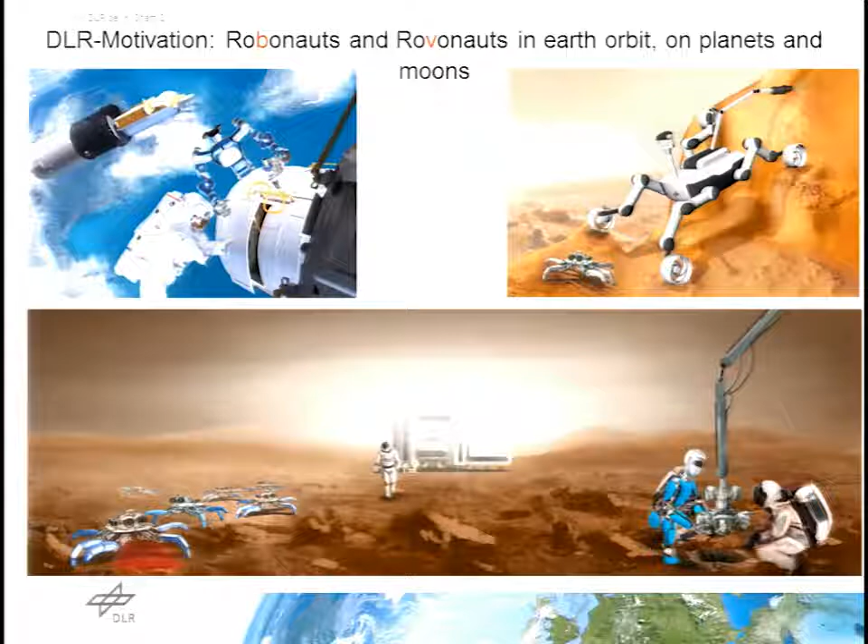I will speak about actuators for robots interacting with humans and unknown environments. Our primary motivation as an institute working in space is to design robots which can interact with completely unknown environments like planets and moons, or are able to interact with humans, with astronauts, to solve complex manipulation and repair tasks.

But generally, the idea of having safe and reliable helpers to humans is as old as robotics, and Isaac Asimov's literature with his famous laws of robotics made this popular.

In direct line related to that are some science fiction movies. One of them plays in Chicago 20 years from now. In the upper corner, you can recognize probably the structure of the loop. I have chosen some sequences because this movie carefully shows what we would like to have from such robots.

You see here, robots should be safe and reliable to humans, should solve tasks which are dirty and difficult to be done by humans, should solve some tasks with higher than human performance, and being a good companion. And of course, we would like this robot to move at velocity and performance which is similar to humans.

But probably most of the robotic people watching this movie ask themselves, what would I put into that actuator to have a robot which is that slim and as fast as it is today? And will we succeed in 20 years from now to build something like that? So this is what my talk is about: our activities towards actuation.

I would like to highlight mainly two perspectives in our evolution. We invested in the last 20 years some time in designing lightweight structures where we focused on the mechatronics design, integrated modular components. The main feature is the fact that they have software-based compliance using torque sensing.

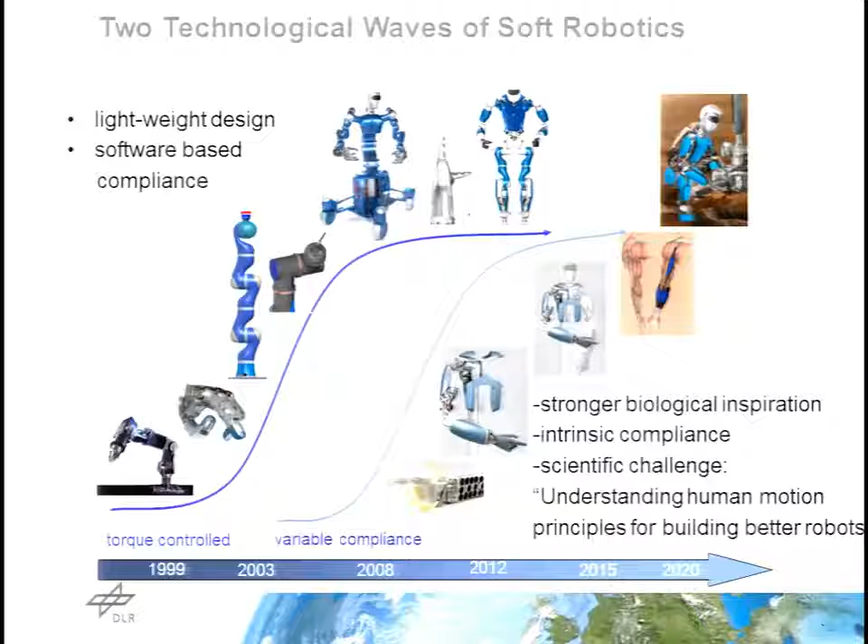So just to summarize the technology which is today considered state of the art, and we were one of the institutes pushing this technology forward: standard mechatronic design in the sense that we have brushless motors, which are optimized for high torque at low velocity, harmonic drive gears, but most important, we have the torque sensor, which is placed after the gearbox and allows for compensating of friction and reducing the inertia, such that you have an almost ideal torque source, which has been the dream of robotic control designers for many decades.

And still, these robots intrinsically, parasitically, have some compliance. So you need the torque sensor also to compensate for this elasticity. But this comes parasitically with the lightweight design, and was not introduced by purpose at that time.

But still, we had to learn how to deal with this compliance, and there has been some seminal work of Alessandro De Luca and Mark Spong, which helped us in that way.

And on top of this torque interface, we have compliant control. Again, based on great work of Neville Hogan and Oussama Khatib. Stefano contributed a lot to compliance control.

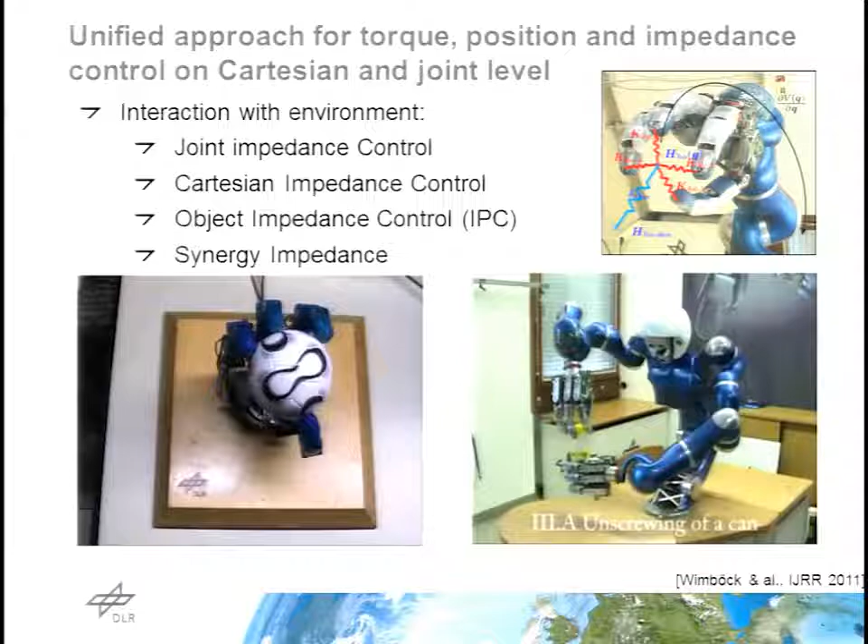The basic idea is that you have virtual springs, which you attach to the rigid robot in order to grasp objects. You would attach springs from the finger to the middle of the object. And then you would transform those virtual spring forces to joint torques.

This is a very simple concept, but can be hierarchically extended to grasp with two arms, to move objects around in several hierarchical structures. And you always do the same: you compensate gravity mostly based on motor position, but you have to take into account elasticity.

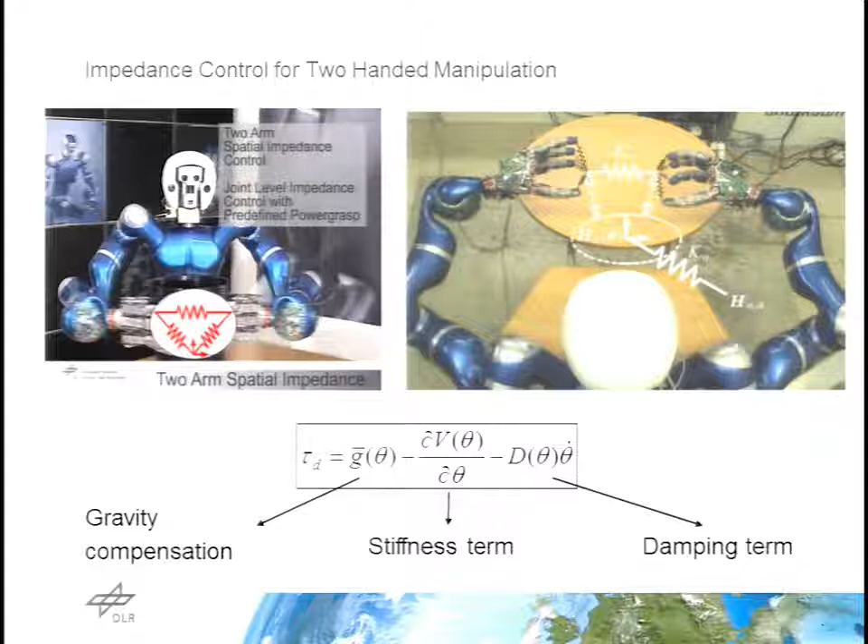Then you have one component which is related to the derivation of the elastic potential, and by deriving this with respect to the joint position, you provide joint torques, and then you add some damping. This is pretty simple, but we extended this over the last years to more and more complex structures, like the humanoid.

With 43 degrees of freedom, you can see hierarchical tasks: the robot holds the position, follows the human, avoids the collision with the second human, avoids singularities, controls the posture, and so on and so forth.

But you have to keep in mind that all this structure is purely implemented by control, and the robot is more or less rigid.

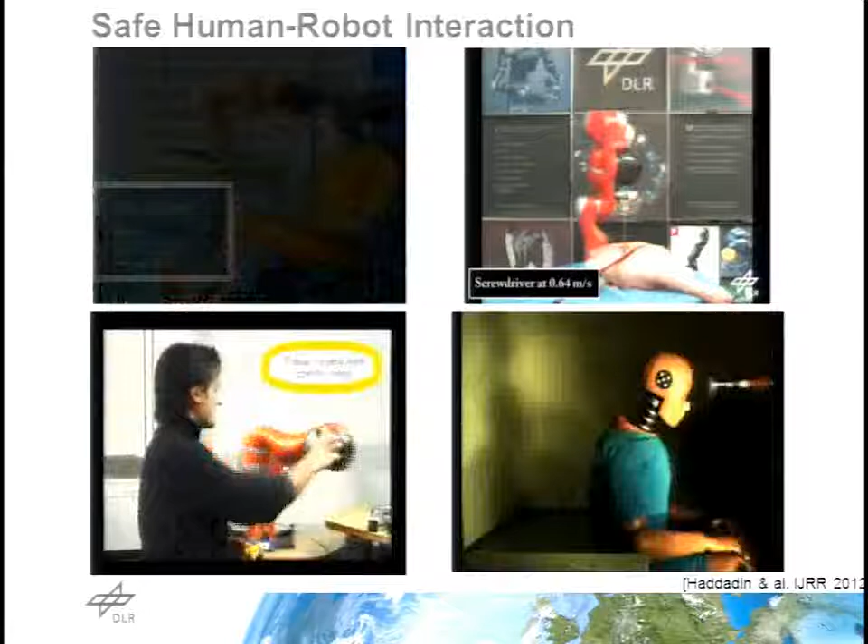You can use torque sensing also to detect collisions with high accuracy in order to provide a safe robotic system, and this was what we had to deal with when commercializing the lightweight robot structure, or the lightweight robot technology, with our partners from KUKA.

This technology, because of its modularity - the whole electronics and mechanics placed within one module - could be extended to more complex humanoids like Justin, and also to other application areas like medical. As mentioned, we spent a lot of time commercializing this technology. Many of you know the robot.

The last prototype I would like to show, since I started by motivating with humanoids, is the work done by Christian Ott and his group integrating the lightweight robot components into a humanoid. He started this work after spending time in Japan, in Yoshi Nakamura's lab, and extended the work we'd done for manipulation for several years into balancing on uneven ground.

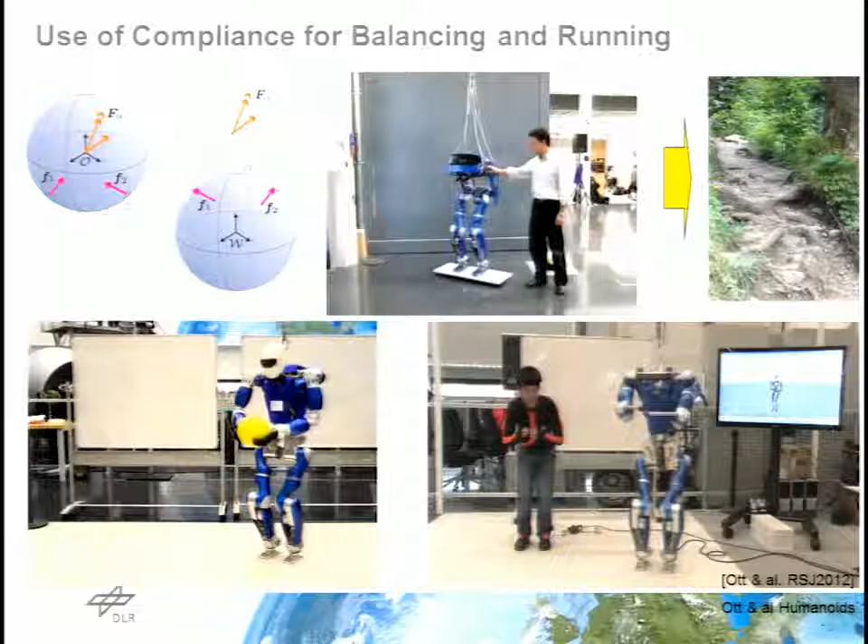Intuitively it is clear, but he has methodologically shown that grasping and balancing are closely related. Basically it's a dual problem - balancing as you would manipulate the ground.

Of course we are not the only ones doing humanoids with torque interfaces, especially on hydraulic actuation. There has been very impressive work starting at Sarcos, and the newer work with Atlas by Boston Dynamics. They have hydraulic actuation, which also has precise torque sensing, and all those robots have very good control performance. However, they have limited power to weight ratio, and this is particularly true for electromechanical actuators.

This was also one of the main messages at the IROS workshop on actuators, where we saw that many designers still struggle to design actuators which preserve the performance of electromechanical actuators, or electric motors - which is very high - but this performance drops as soon as you attach gearboxes, and becomes much worse than human performance. So we're still searching for ways to improve torque at low velocity in order to achieve biological performance.

One other drawback is important for these systems. If you look at these pictures, and those working with these robots know, you'll notice there is always a cable suspending the robot to prevent it from falling down. Everybody knows why - if such a robot falls down, the control compliance is not fast enough to react, so most probably the robot will be damaged.

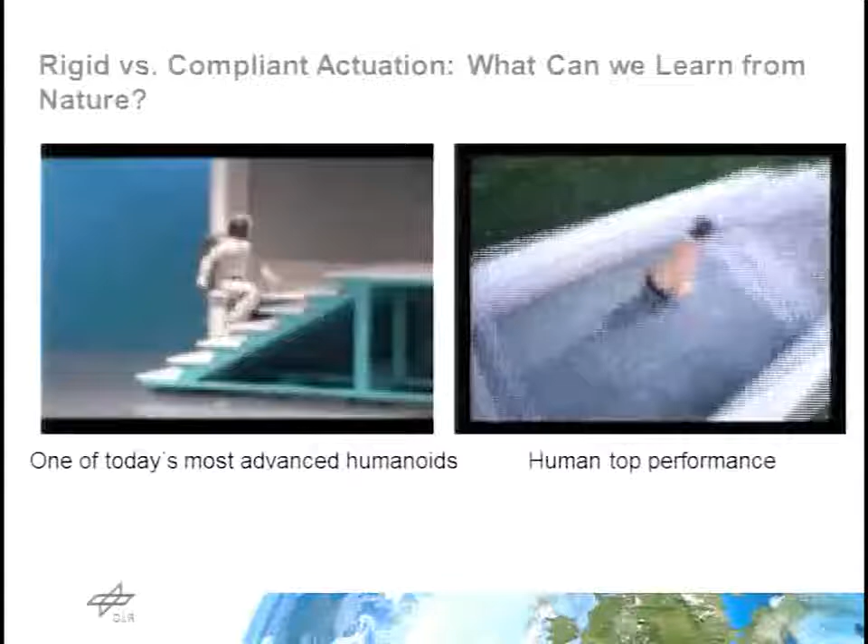This is, of course, in striking contrast with what humans can do - well, at its limiting or high-end performance at times. And this motivated researchers over the decades to think about deliberately introducing elasticity into the system.

It's easy to see why on this picture showing a parkour athlete. He uses the elasticity of the tendons and muscles, first to store energy when jumping and producing an explosive motion, and on the other side to absorb energy at the impact when falling down, and to limit the peak torques at impact in order not to damage the muscular structure.

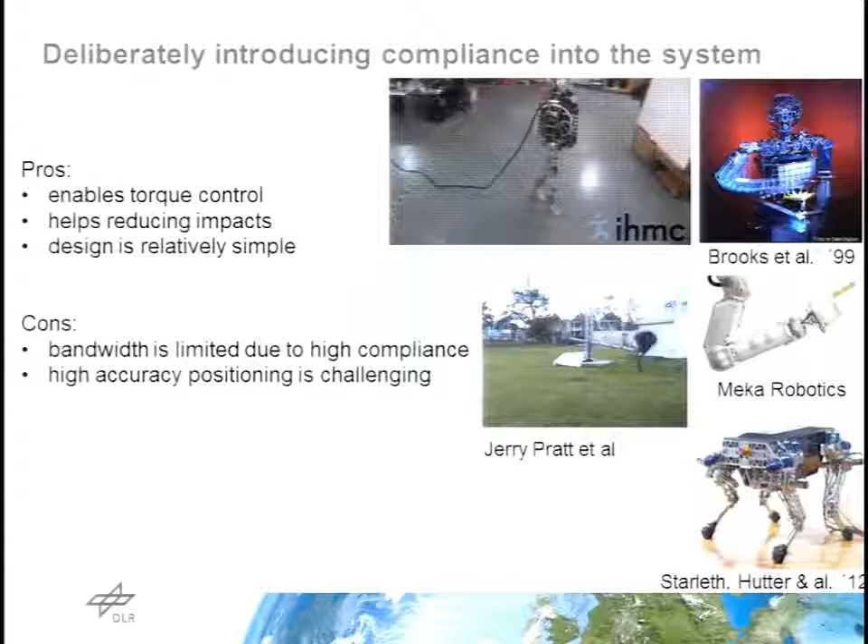In the early 90s, this idea appeared mainly in groups in the United States, and here are some images showing series elastic actuators. They had the big advantage of being able to provide a torque interface of pretty good quality - although probably not as good as with a torque sensor - but they help reduce impacts, and they have a relatively simple design: you only have to introduce an elastic element in series with the structure.

We have here several examples from manipulation but also from locomotion - some videos kindly provided by Jerry Pratt, showing the Spring Flamingo and the humanoid.

Interesting technology. One drawback might be that due to the very high compliance, bandwidth is limited, so as soon as you would like to do a very fast motion to react quickly, this is a limitation. High accuracy in positioning is also a challenging task - we've seen that even for the lightweight robot it's a challenge to deal with compliance, and in a compliant structure this is even more difficult.

This motivated groups worldwide, particularly a pretty large group in Europe, to think about systems more inspired by biological examples - looking at the way antagonistic muscles are used in biology to generate motion and robustness. Antagonistic muscles can move the joint but also co-contract to change stiffness. A simple example of how you can translate this into a mechanical system is using two motors with two tendons.

And by moving the motors, we will move the link. You need a nonlinear elastic element, but by pre-tensioning the string, by increasing the tension in the cables, you could increase the apparent stiffness of the system.

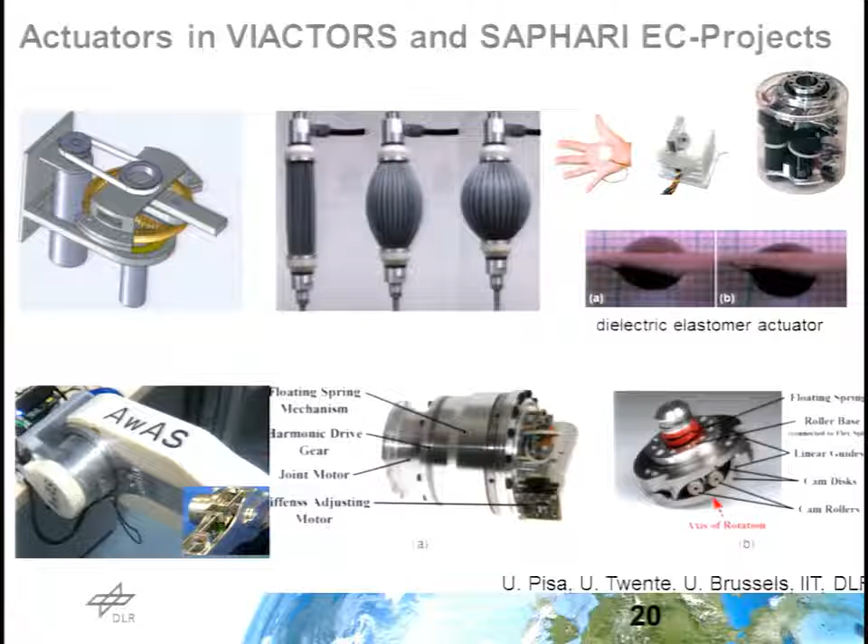For example, one solution which has been adopted also in our prototypes and also in Antonio Bicchi's prototypes is to use the fact that motors can not only pull, but they also can push. By closing the wire loop, you can use actually both motors to hold heavy loads,

and then you can make use of the whole mass of the actuator for holding and moving around heavy loads, while still you can co-contract the system to change the stiffness in the way described before. And again, the impact goes to the springs and not to the system.

Another way to save weight, if you don't want to change the stiffness quickly, is to use one large motor, for example with harmonic drive gears, to move the joint, and then just use a smaller motor with high gear ratio to pre-tension the springs and change the elasticity of the system.

But obviously, each design has some advantages and some drawbacks, and it's hard to compare them by just one number, as we thought initially when we started this work. Instead, we had some very intensive debate and came out with a list of characteristics which describe this kind of actuators.

So in addition to the classical power, torque, velocity, and so on, you need, for example, to describe the stiffness range of the actuator and how the stiffness range changes when the torque changes, how fast you can change the stiffness, what's the maximal energy you can load on such a system, and so on.

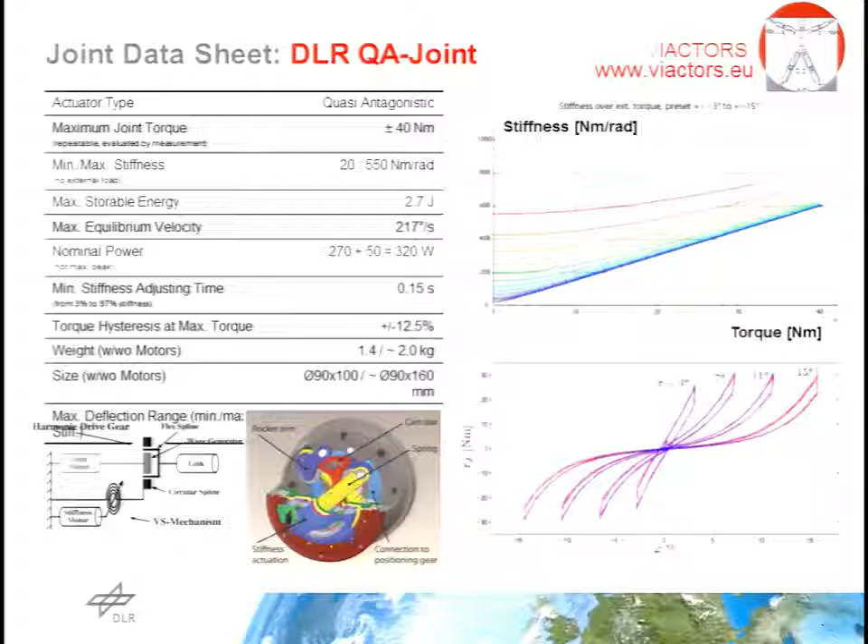Just two examples of very, very different applications. Actually, at DLR we focused on highly integrated, very complex prototypes in which we try to mimic the performance of the human arm as best as possible.

In contrast, the group in Pisa is focusing on commercializing systems and providing the scientific community with systems on which they can develop software and controllers, and which are affordable in the low-cost area. And of course, the systems will then look very different.

For example, in our case, we have 19 degrees of freedom in the hand, 38 motors in the forearm, 7 degrees of freedom in the arm. This leads to a large number of actuators, of course. So for the whole dual arm system, we have over 100 motors.

And because this is a first system which we built and we wanted to experiment with different designs, we introduced this antagonistic actuation, but also this quasi antagonistic actuation, and also the design with a harmonic drive with a small gear pretension, just to have a comparison of these different approaches.

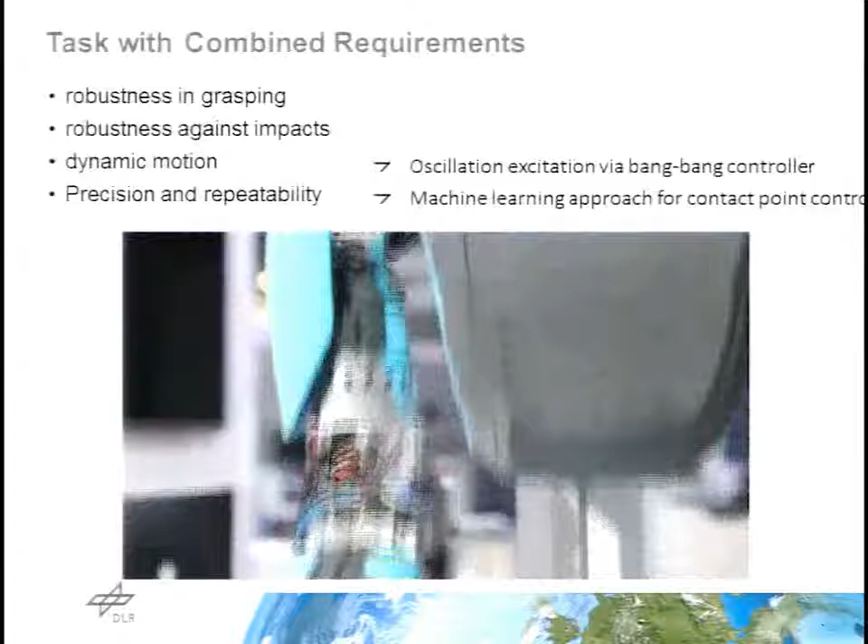And here I show a video which we developed for the Automatica fair last spring, showing the main features of variable compliance actuation. This is a task in which, first of all, you have to grasp an object and hold it robustly, also during impact.

Then you have always a hard impact of metal parts which would damage standard robots. Then you are using dynamic motion. Actually, this is done in resonance by using the springs.

And still, this is very precise and repeatable. You can see that we have, by a learning technique, accuracy below 1 millimeter by using iterative learning control. This is the DLR logo, which has been printed there.

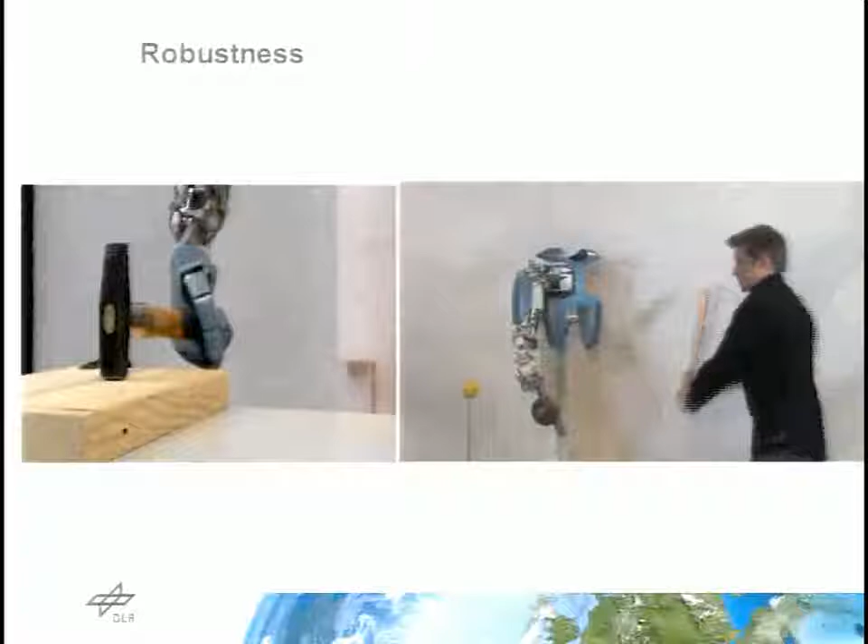So I think altogether, you need variable compliance to have all these features in one system at the same time. Some videos summarizing the main features. Robustness. You could not do that with a rigid robot.

You need series elastic actuation or variable compliance to withstand such impacts. Control cannot react so fast. Explosive motion, storing energy to throw objects, is also essential, requiring compliance. What we focused on more and more in the last years and months was cyclic motion generation.

I gave a talk at the workshop on Sunday, so I won't go into too many details, but variable compliance and compliance actuation in general is essential for this kind of motion. We noticed the community still has difficulties deriving controllers and planners that really excite elastic systems into resonance, because we lack a precise mathematical description of resonance in nonlinear systems. And optimization tends to take very long and breaks down for many degrees of freedom.

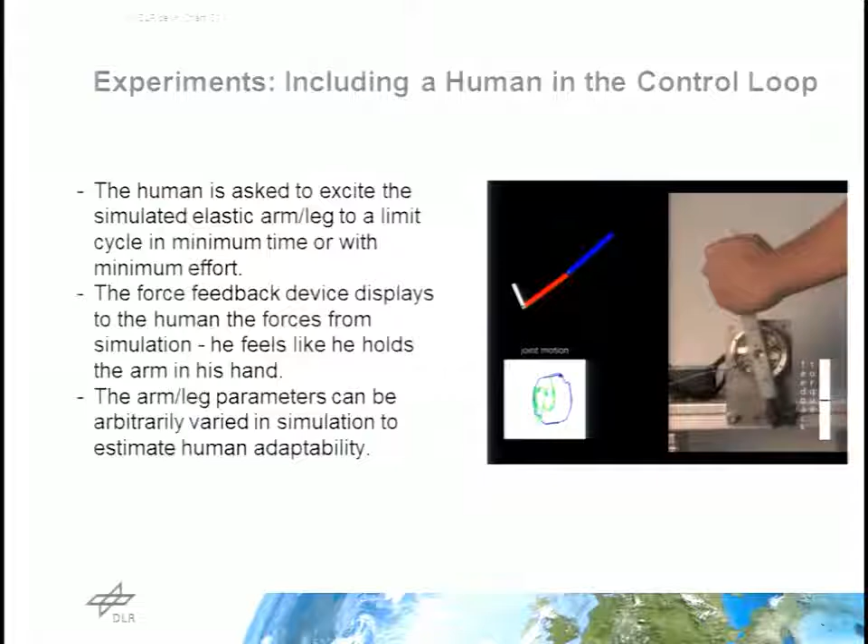So we did some experiments, trying to understand why animals, and in particular humans, are so good at exciting elastic motion. The experiment used a virtual reality device, asking humans to excite the motion of simulated robots.

We found that for one degree of freedom, the law is very simple. If you ask people what they do, they answer: we wait until the torque is high enough, then introduce energy by giving a jump in force or position. This is simple for one degree of freedom.

I won't go into details for more degrees of freedom, but the essential idea is to scale this concept to the multidimensional case by identifying the first oscillation mode of the system and exciting it using this bang-bang controller idea. To achieve that, one uses an adaptive mapping between the n-dimensional torque and the one-dimensional direction of the principal mode.

This mapping is adapted by a learning technique. Then in this one dimension, tau z in this case, we excite the oscillation motion, and project back into position space. All in all, although this control law was derived using pure robotics tools, it can be shown that it maps easily to a neural network.

It's a fan-in, fan-out configuration with very few neurons, which can also be trained with pure Hebbian learning, which is biologically plausible. With very few neurons, you can train the system to excite limit cycles without model knowledge, using just kinematic information of the system, which is an interesting fact.

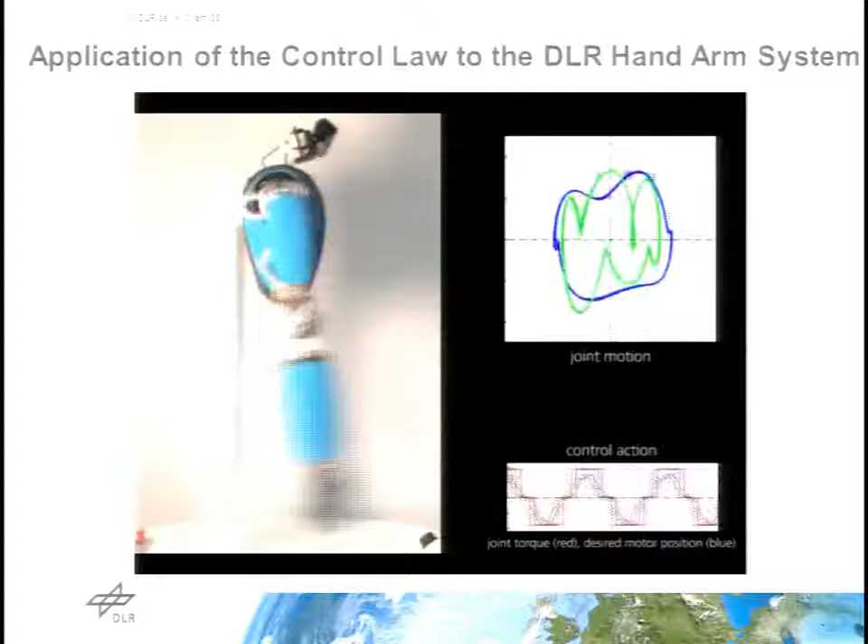We hope this idea can also be applied to designing running systems. We did some simulation work, and had several discussions with people already building series elastic locomotion systems, like ETH or Oregon State University, hoping to apply this to locomotion where elasticity is probably most relevant.

With this I'd like to conclude, showing that we are at a point where the design of our robots is so close to human biomechanics and human properties that by recreating these functionalities in robots, we can learn about the structure and control of humans, and at the same time use this knowledge to improve our robots, bringing this benefit back to humans through better rehabilitation devices, prosthetic devices, and assistive devices. Thank you very much.

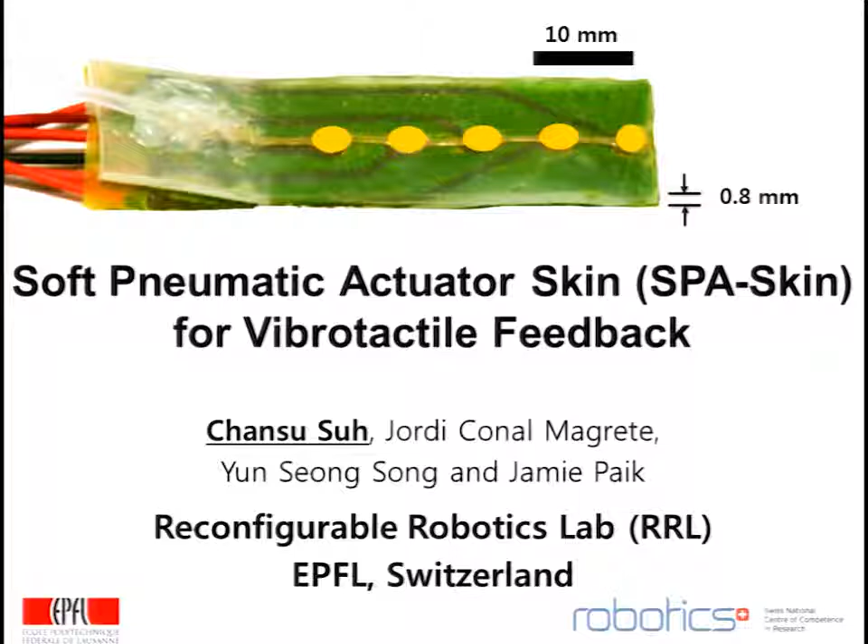Wearable devices often need to produce electrical, mechanical, or thermal stimulation upon receiving external force. Among them, one of the safest and most often used is vibrotactile feedback. Using different patterns and intensities of vibration, we can regenerate different tactile sensations in various locations on the human body.

Human skin can decipher a wide range of vibration and haptic feedback. This, of course, depends on surface and material. Vibration is characterized by the combination of amplitude, frequency, and direction of the signal.

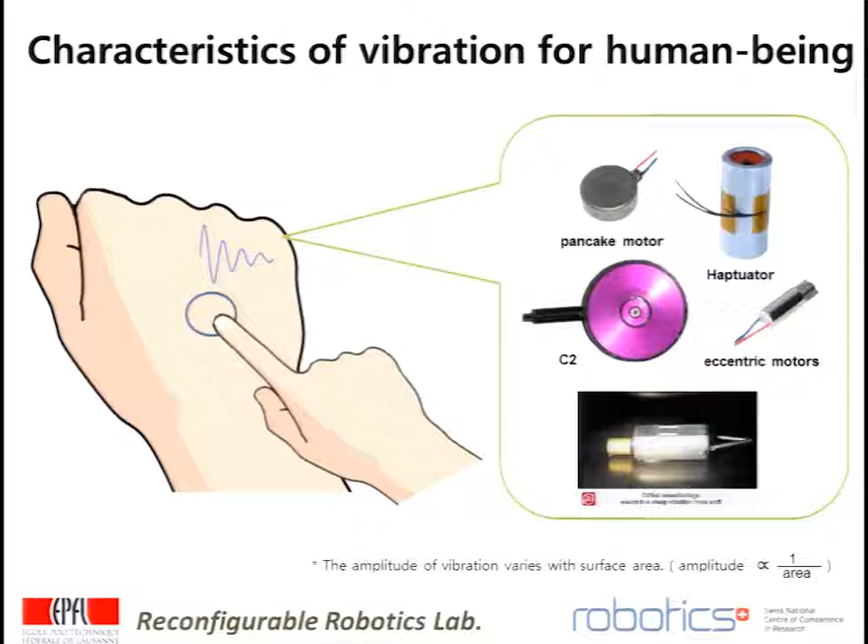Currently, there are many kinds of vibration motor. However, the choice is limited, as most of them are very thick and heavy and have only one linear direction of vibration. SPA-Skin is a novel vibration actuator embedded with a distributed sensor that can produce highly customizable, lightweight input-output devices for tactile feedback.

SPA-Skin has multiple points of actuation, which are all embedded with a discrete sensor, here 5. They can not only sense its own vibration, but also measure external force as well. This SPA-Skin design can vary and accommodate multiple configurations, so it can cover wider and curvier surfaces for actuation and sensing.

This customizability allows SPA-Skin to be ideal for wearable robots, covering different locations on the body. This figure shows application on the hand and forearm, but you can easily see the application on the shoulder and chest as well. What is here is the sensor embedded actuator with 5 actuation points. The frequency is 25. The 5 boxes show the sensing location, they stay green and blink for each actuation, and turn red for the external force.

The main contribution of the novel SPA-Skin is we have presented a highly intensive vibrotactile feedback hardware that remains highly flexible, a lightweight wearable device, and distributed sensing and actuation allows it to be applied to many kinds of applications.

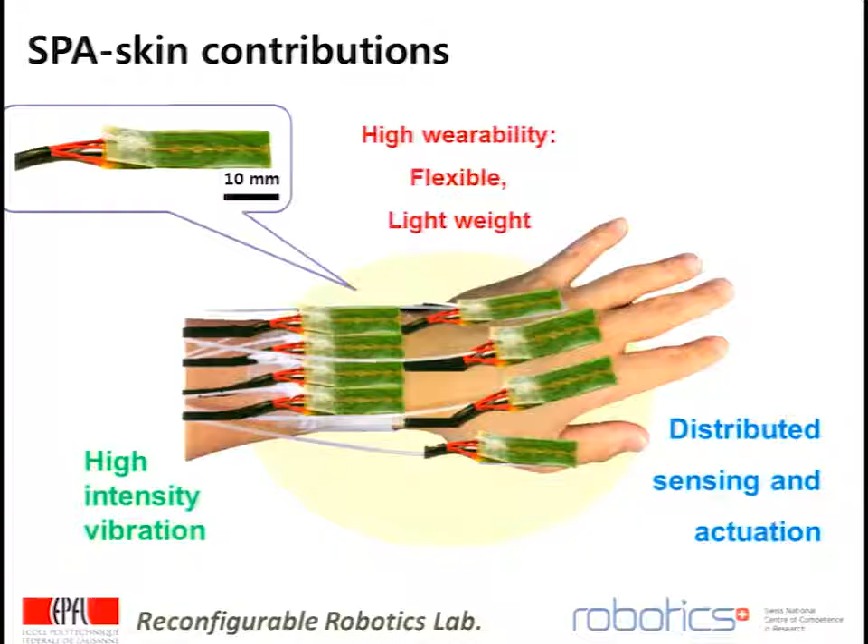I want to introduce an interesting transmission idea that we are working on. Let's say there is a string or a bundle of strings. If you twist it, then it contracts. So by applying small input torque, we can obtain a large amount of contraction force. Basically, a string is a kind of gear.

By coupling a rotational motor on one side, we can make an actuator module, and we named it twisted string actuator, in linear or rotational configuration.

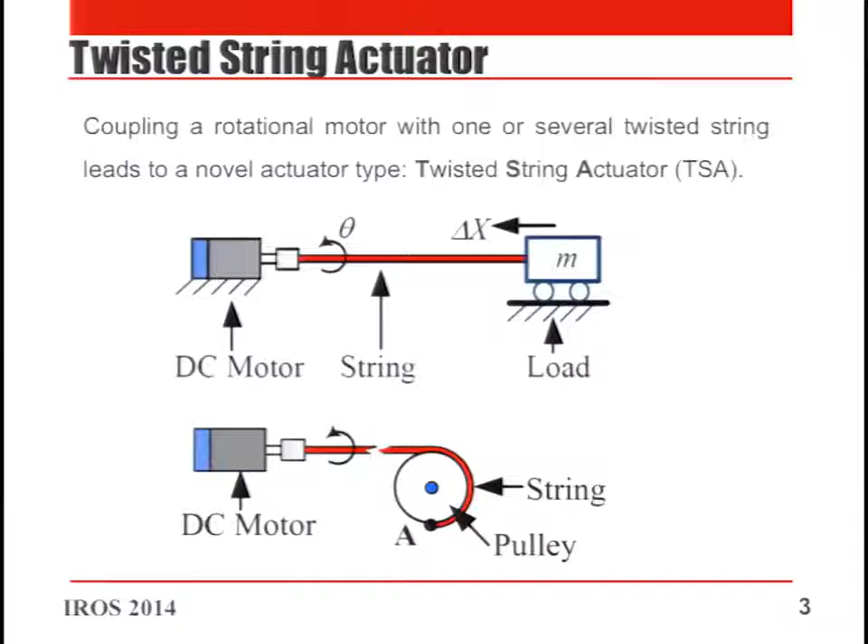The TSA has several fascinating features, especially in robotics or exoskeleton kind of systems. It is very light, cheap, and easy to replace, and can transmit power over distance. It is intrinsically compliant and also backdrivable, and the motor can be placed coaxially with the axis of motion, so we can save lots of space in designing.

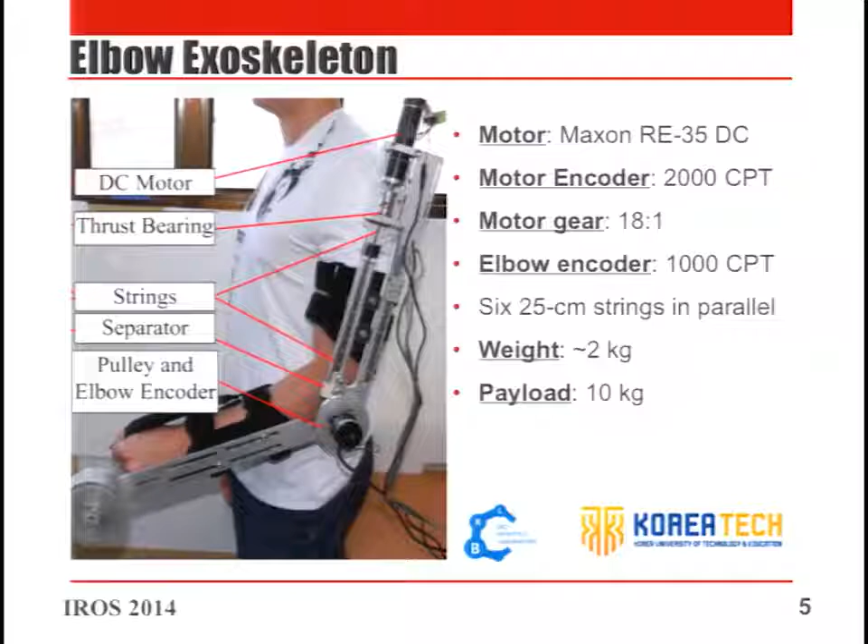It can also tolerate some misalignment, so it can be applied to soft and wearable exoskeleton systems and wearable devices. This is the first prototype that we developed several years ago. It has a weight of 2 kilograms and a payload of 10 kilograms. As you'd expect, it has a unidirectional control limitation.

So to overcome this, we proposed a bidirectional elbow exoskeleton. This video clip shows you an idea of how this bidirectional elbow exoskeleton works in action. You can lift up heavy weight at a reasonable speed.

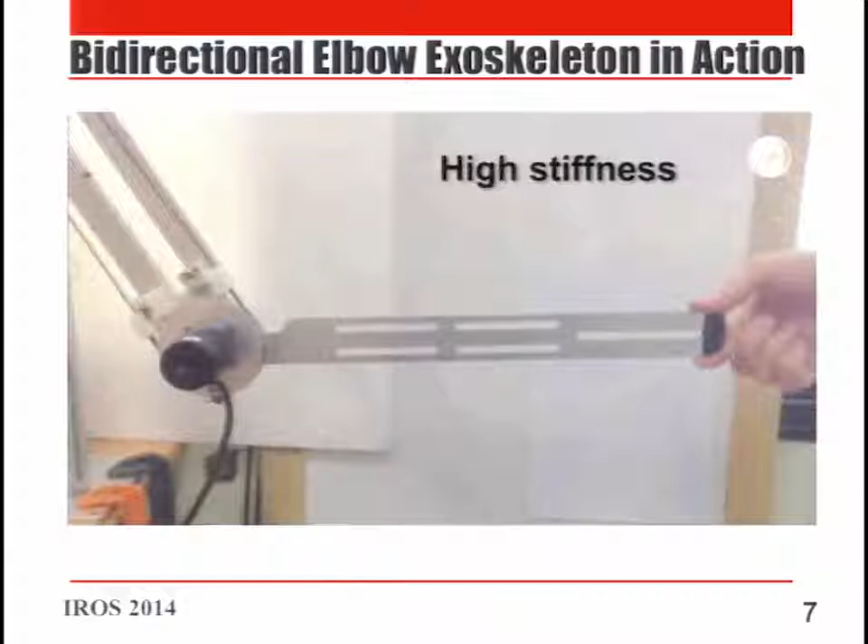By twisting and untwisting both of the wire strings at the same time, we can adjust stiffness, so high stiffness and low stiffness. One interesting feature is that due to the backdrivability, we can easily detect human intention, which can help trigger the motion of the exoskeleton system.

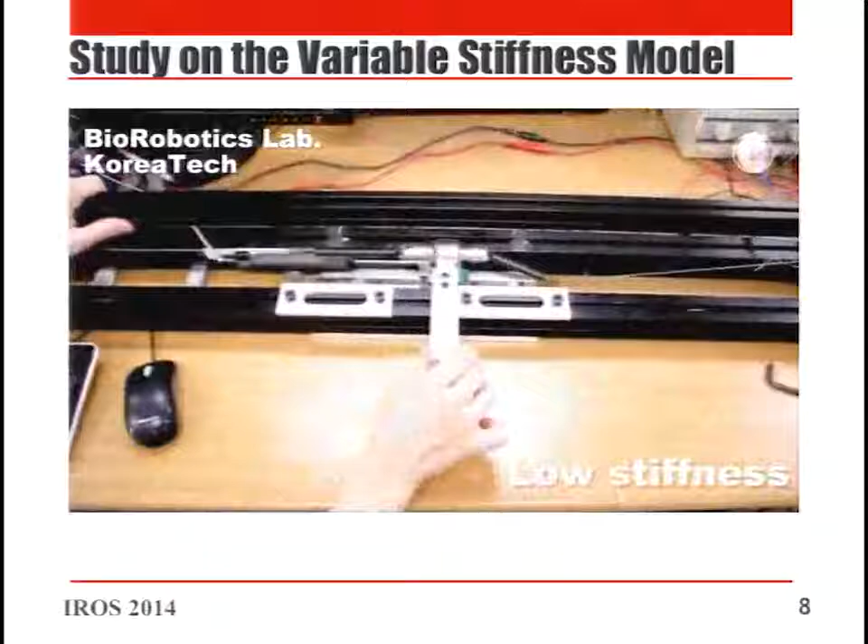In particular, in this paper, we have done some study on a variable stiffness model, because we know we can change the stiffness, but we didn't know the exact relationship between the amount of contraction and the stiffness variation. So we made a variable stiffness actuator module and did some study about this.

As a result, we found that we can control the position and the tension independently. If you want to know more, I want to see you in my interactive session. Thank you.

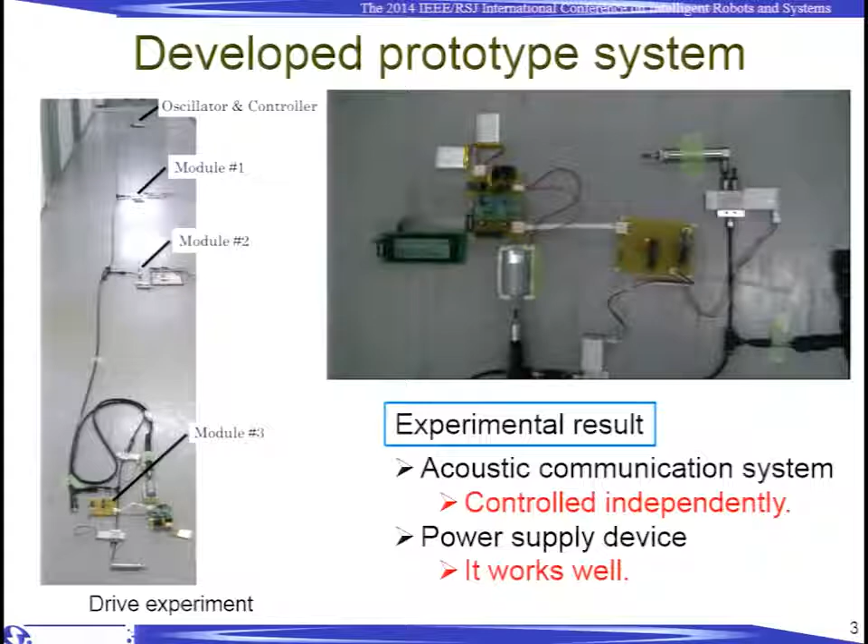Okay, please look at this movie. In this experimental result, 3 pneumatic cylinders are independently controlled, and the power supply device also works well. Thank you for your kind attention.

At Disney, we are very interested in creating compelling interactions between people and robots. While human safety is an absolute requirement, we are not willing to sacrifice speed or expressiveness.

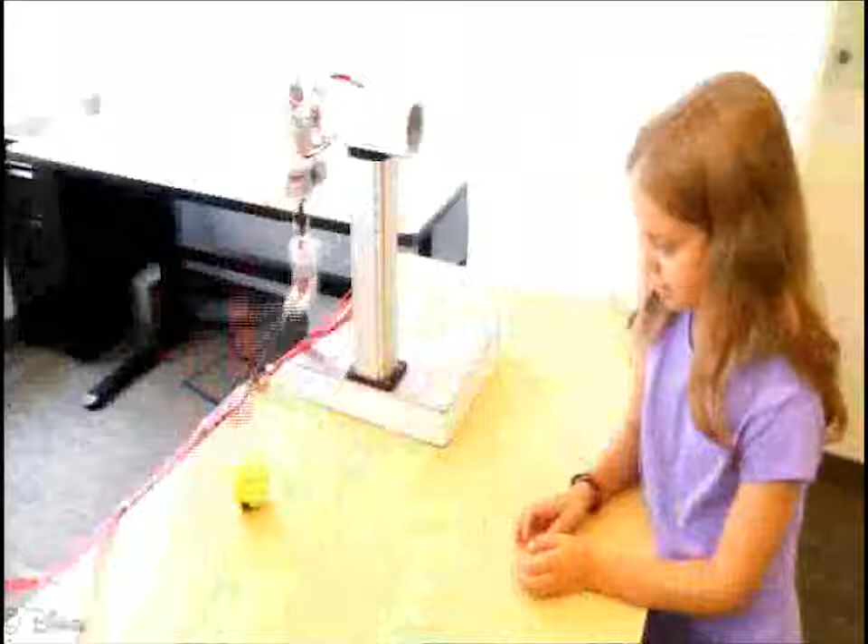To this end, we have developed a new type of passive hydrostatic transmission with either air, as in this arm, or water as working fluids. The transmission is leak-tight and low friction.

This pair of 4 degree of freedom robot arms are identical and connected only by pneumatic tubing, without any motors, sensors, valves, or controller. The key element is using rolling diaphragms to seal the cylinders. They provide a hermetic seal, and their rolling motion eliminates static friction, in contrast to conventional sliding seals.

We use pairs of cylinders to allow bidirectional operation, with the transmission fluid pre-pressurized to half the maximum operating pressure. This removes all backlash from the system. The transmission has very low impedance. There is no spring rate, and because of the transmission's symmetry and low friction, it is completely backdrivable.

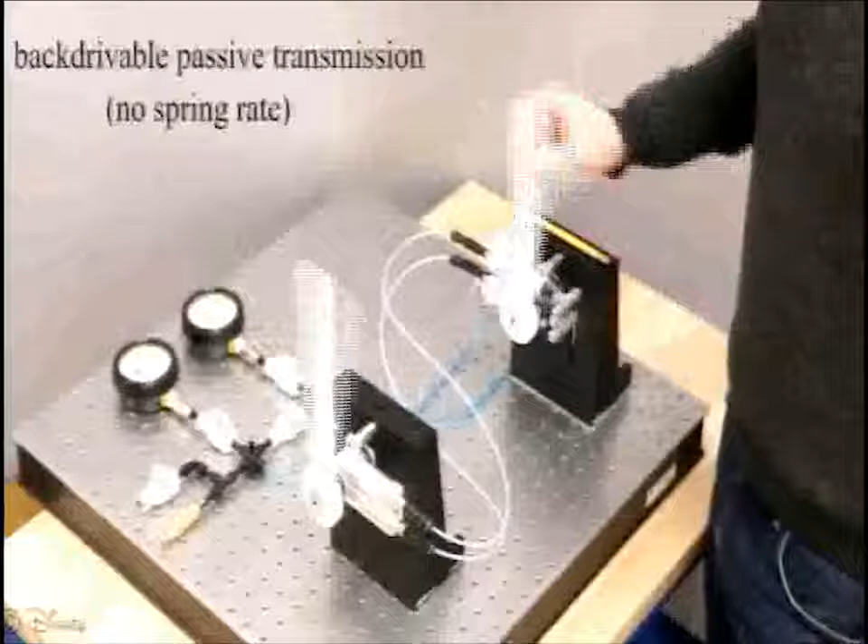The transmission is used passively for remote manipulation, as in the robot arm, or may be motorized at one end. Since it is fluid-based, we achieve high torque density at the endpoint actuator. The arm or limb is much lighter than if a geared electric motor with equivalent friction and torque performance was located directly in the arm instead.

With water as a transmission fluid, we achieve high stiffness and no lost motion between input and output. Fluid-based transmissions allow flexible hose and tubing connections and provide easy and adaptable routing. This transmission is capable of moving heavy loads at high speeds with very smooth motion.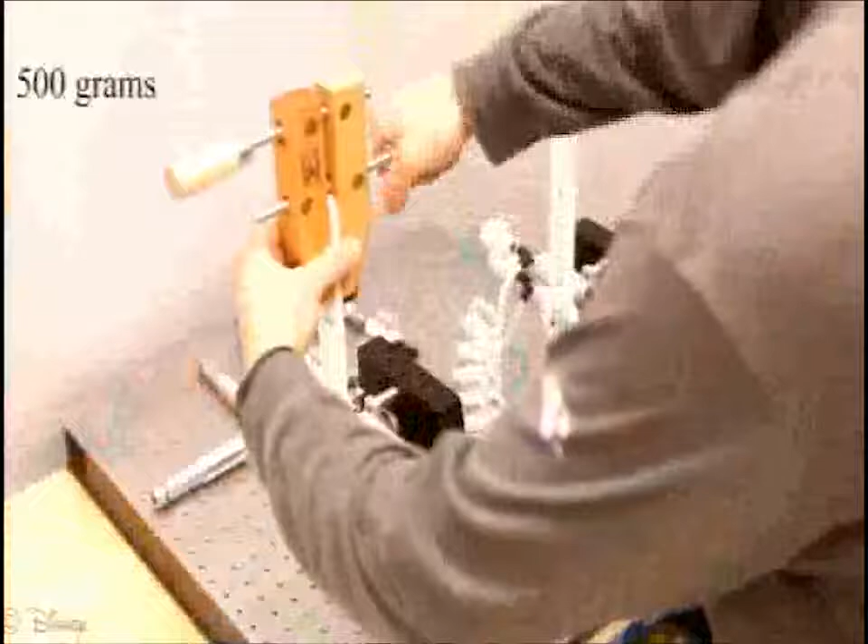The end-to-end delay through the transmission is only 12 milliseconds. Under high-speed video, you can see here.

The water-filled transmission achieves a force bandwidth in the tens of hertz. Combined with its high stiffness and low static friction, we find unexpected haptic performance. Surface textures can be felt through the transmission.

Here are work loops obtained under manual manipulation. In red, we see high stiffness when the input is blocked, and in blue, the measured output force against a virtual spring. Forces are very smooth with a measured hysteresis of 6% full range torque and a maximum static friction of less than 1% full range torque.

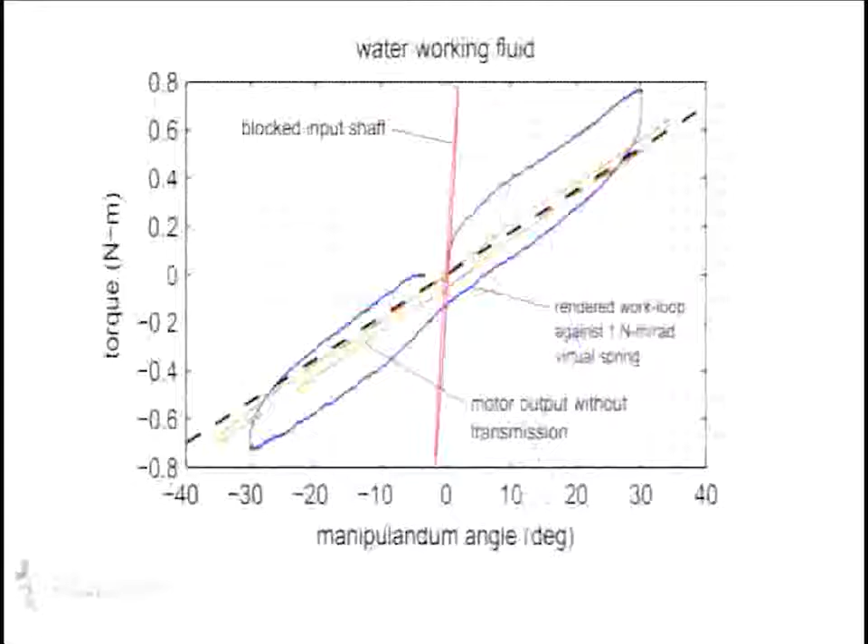In the latest version, the actuators weigh 120 grams, can deliver 4.5 Newton meters continuous torque, and have a 135-degree range of motion. Please come to our interactive session.

We have brought the robot arm with us. You can practice your glockenspiel playing. Thank you very much for your attention.

Good afternoon, everybody. My name is Clem Matthijssen. I'm from the Vrije Universiteit Brussel in Belgium, and I would like to present the work of my colleagues and myself on the design of a novel intermittent self-closing mechanism of a MACCEPA-based series parallel elastic actuator, or SPEA.

The motivation of our work comes from the fact that humans are still outperforming robots in many ways, for example their capabilities and efficiency, while on the other hand the electric motor is actually outperforming human muscles, for example regarding power density and maximum efficiency. So we come to the conclusion that the way transmissions and springs are used in compliant actuators needs drastic improvement, and we think the main challenges are the torque-to-mass ratio and the energy efficiency.

So the SPEA schematic can be understood as follows. We start from a standard SEA schematic. We add a bunch of springs in parallel there, and then we add de-phased intermittent mechanisms in parallel, which are shown here in yellow.

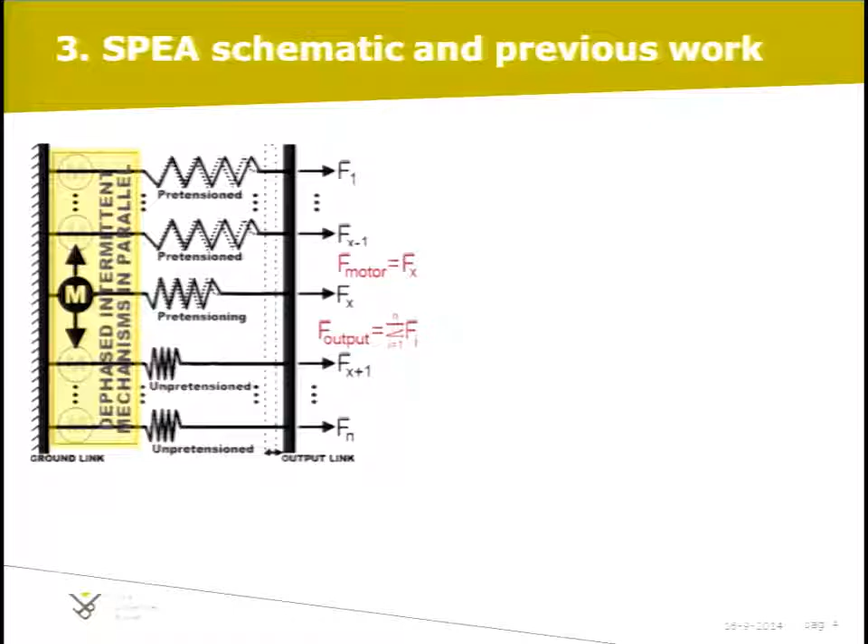So last year at IROS, we presented our first unidirectional prototype, which was based on mutilated gears. Today I would like to present a novel self-locking mechanism which will take care of the variable recruitment and locking of the parallel springs.

The system is based on the MACCEPA Actuator, which was developed in our group 10 years ago. The MACCEPA Actuator is a variable stiffness actuator, so you can change the stiffness and the equilibrium position independently. The virtues are the fact that there's only one spring, which can be linear, and the mechanism is non-complex.

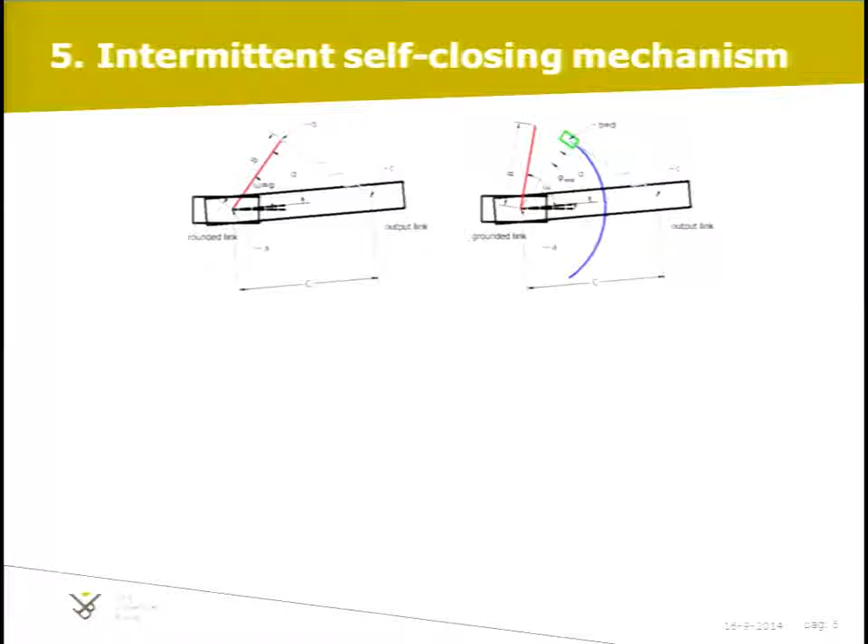So my goal was to keep these virtues and transform this into an SPEA actuator. So what we did was the lever arm in red. On the right is the newest system. We devised a guide that allows the lever arm to detach from the spring at the maximum deflection angle.

I would like to end with a video where you can see the working principle. You can see that the motor is rotating continuously while the springs are intermittently tensioned to the other side, and the self-locking mechanism takes care of the fact that each spring stays locked.

So when the motor is at the outer position, you have the highest output torque, but at that point the motor itself is not loaded anymore.

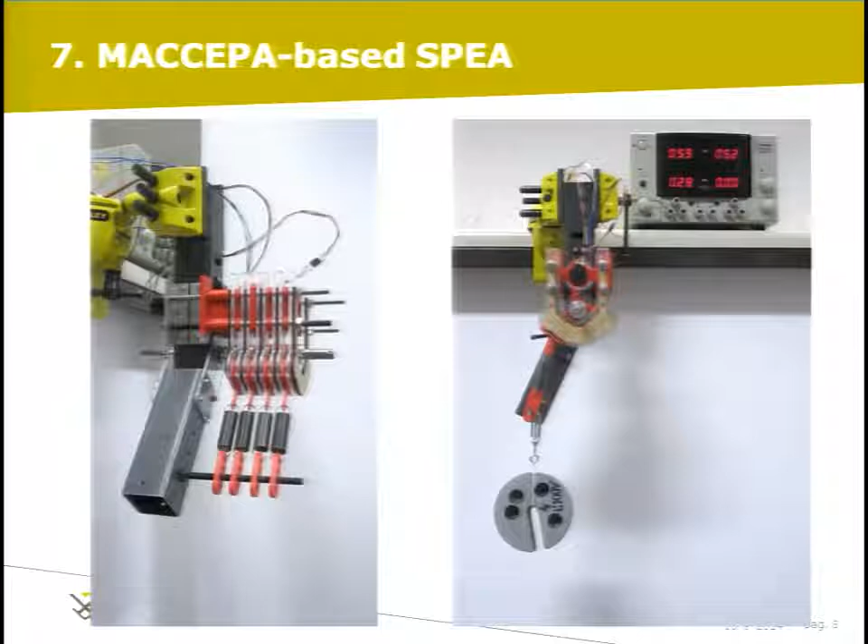Today I'm going to present work on a compliant actuator for biorobotics. More specifically, the aim was to develop a rotary parallel elastic actuator, and our proof of concept prototype was quite novel because it integrates a magnetic spring in the same design as the motor, allowing a very compact architecture which is also suitable to be scaled up and down.

And it is also possible to produce resonant oscillations. Actually, to the best of our knowledge, our proposed solution is the first in literature in which compliance is intrinsically embedded in the actuator.

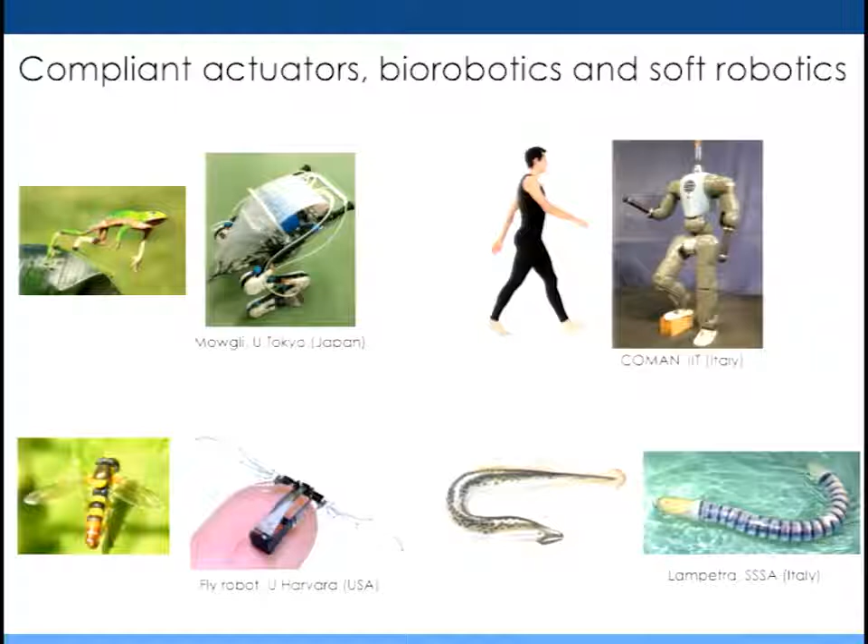I don't want to go into details because we already listened to many talks about the importance of having compliance in the actuator for locomotion applications. These are some examples. But of the two big families we know, series elastic actuators are the most popular, though parallel elasticity is also very useful in producing efficient oscillation, as shown by some examples in the literature.

For example, in some insects we have parallel elasticity of the body that allows the production of elastic torques which help the production of oscillation of the wings.

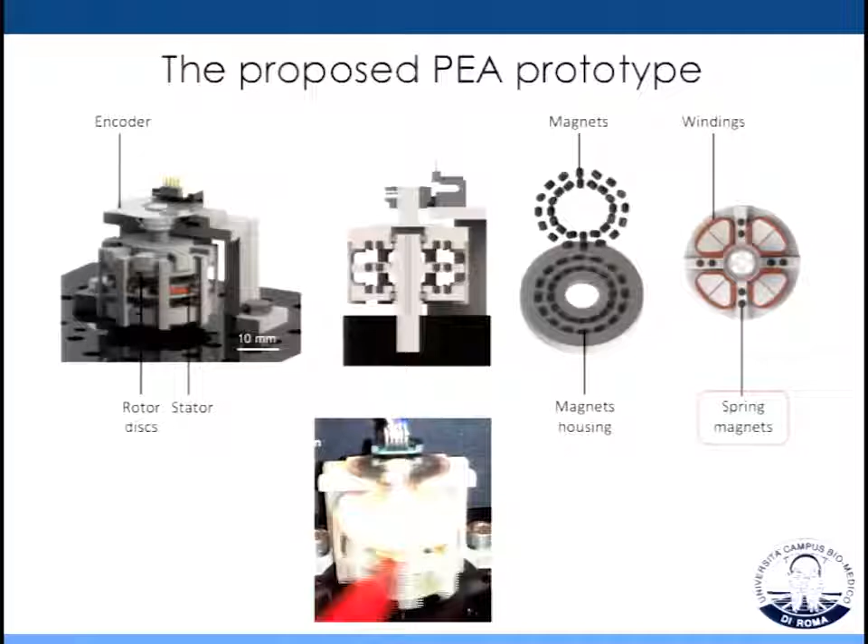So our actuator basically consists of a stator with windings and two rotors with magnets in a Halbach configuration, but the key idea is to add some magnets in the stator so they can be coupled to the magnets of the rotors and produce elastic parallel torques that help the oscillation, as shown in this video.

Here we added a tail to the actuator to implement a small robotic fish, but with some small modifications you can also achieve a robotic wasp, which is quite different but can also oscillate very well.

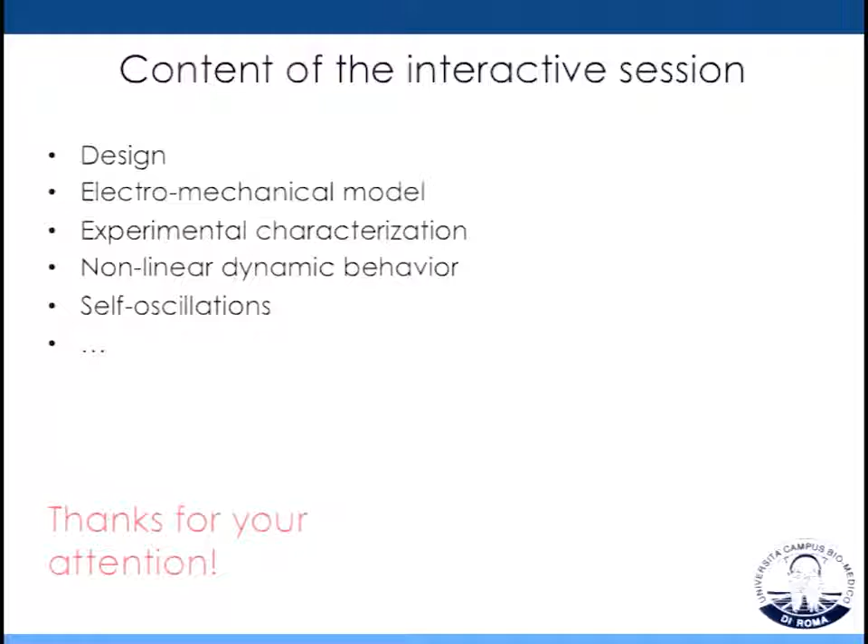For those of you that aren't familiar, McKibben muscles, or air muscles, are soft pneumatic actuators that contract axially when pressurized with air. These sorts of actuators have been used to create all kinds of non-traditional robots.

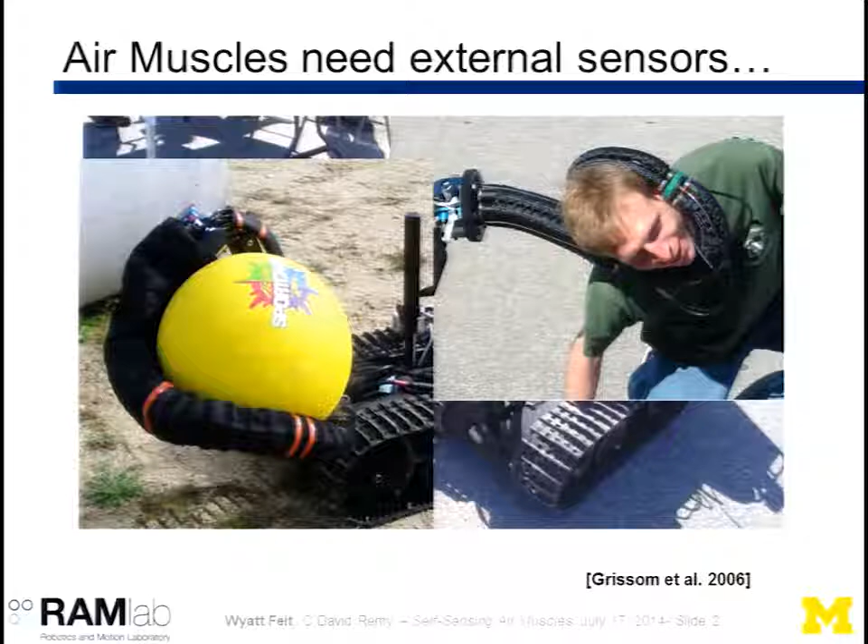But with these hermetically sealed actuators that are good to work in wet and dirty environments, they're still relying on traditional bulky encoders at the base of the manipulator. Here they have string potentiometers.

So here we have an actuator that's well suited for these non-traditional robots and non-traditional environments, yet we're using encoders that are vulnerable to those sorts of things and require traditional structures. It would be nice if these actuators could sense their own position and force output just as biological muscles do.

The way that we propose to do this is by taking that reinforcing braid that forms the contracting element of the actuator and making it into a circuit, forming the braid out of insulated conducting fibers and connecting them together.

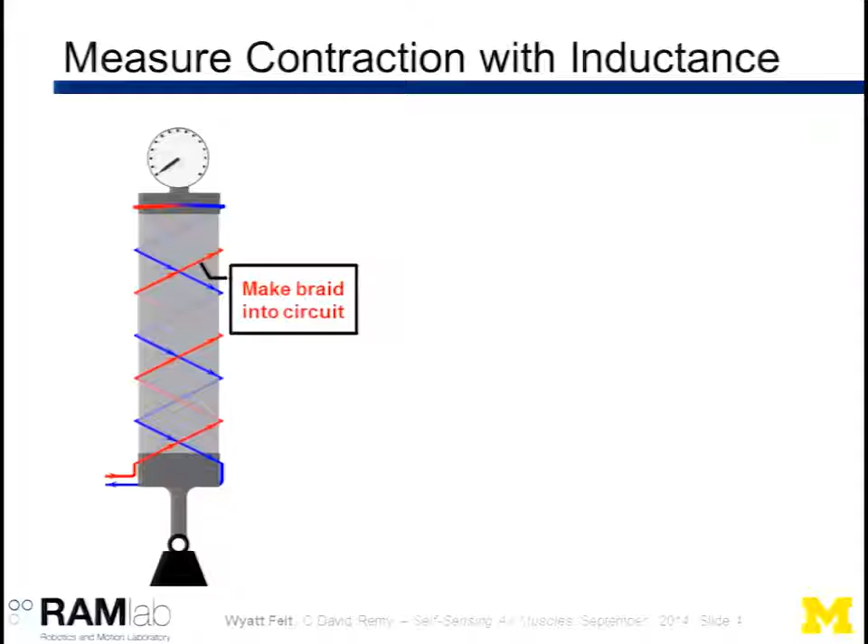And this way, the current moves along these helices, up the axis along one helix and down the axis along the other, constantly circling the axis in the same direction. So in some sense, we've created a solenoid.

If you look at the behavior of this solenoid as the actuator contracts, we can see the cross-sectional area expands and the length changes with the contraction of the actuator. If we look at the inductance formula for a solenoid, we can see that increase in area and decrease in length both result in an increase in inductance of the system. So we're able to characterize this change in alignment in the actuator by looking at the inductance of the system.

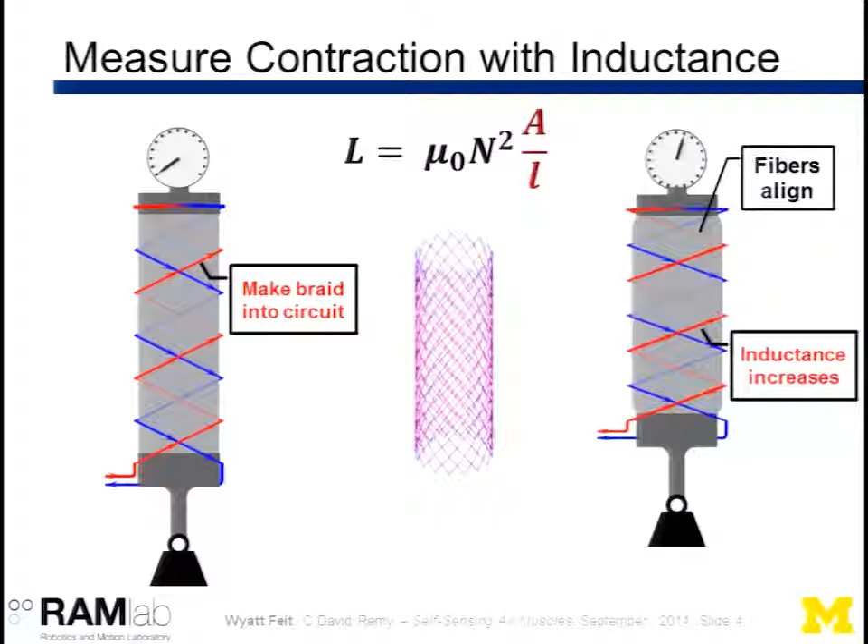Now, in a method similar to a strain gauge, we can characterize the force output of the actuator as well. A load increase on this system results in stress in the wires that we can measure through changes in resistance. So by measuring both the resistance and inductance of the wires, we're able to characterize the force output and change in length of the actuator.

Now with the prototypes we've been able to develop, we've seen a high sensitivity linear response over the contraction range. And this has allowed us to characterize the contraction with sub-millimeter resolution.

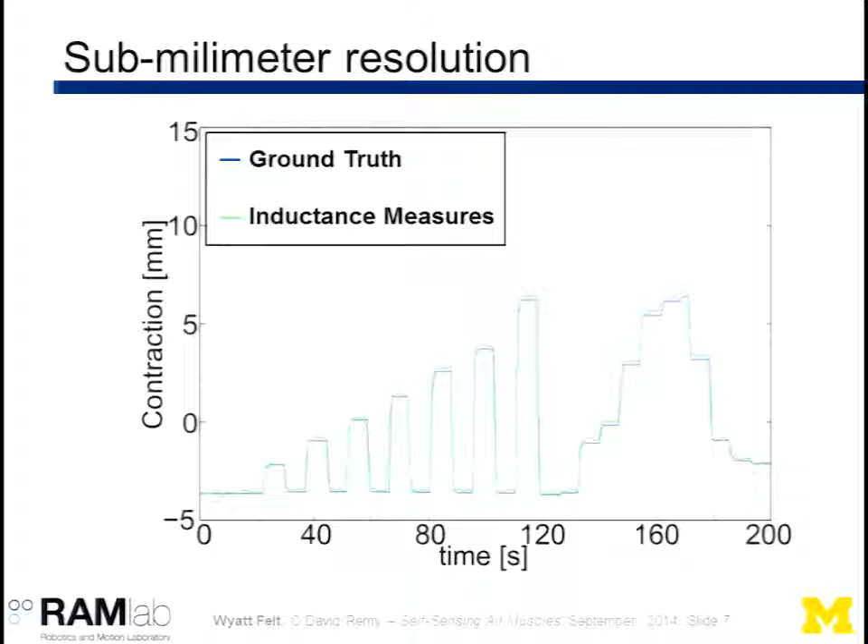Now we're very excited about the applications that this technology could bring, the sorts of robots that it will be enabled to build with non-traditional joints.

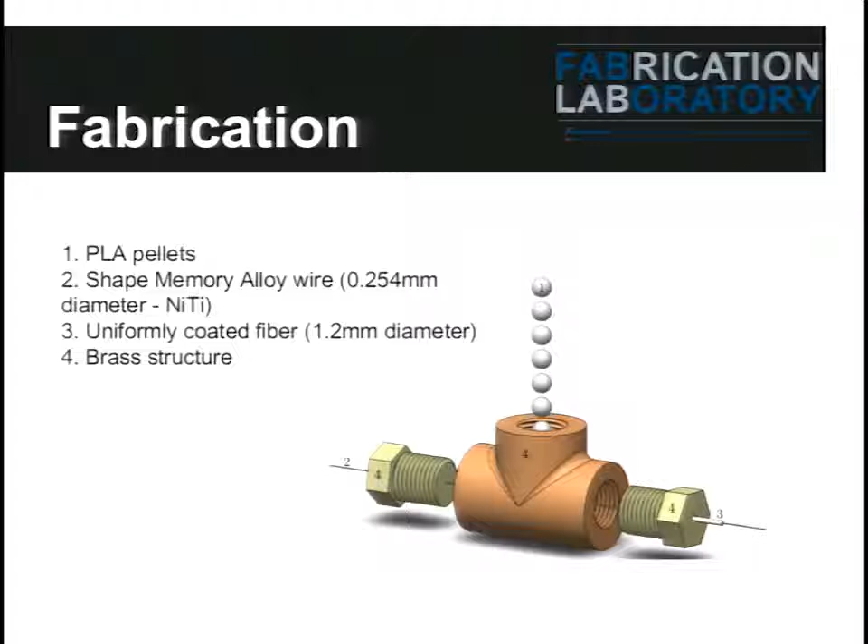Through that, one of the challenges that we're currently working with is that by heating that material, we do have a human interaction issue. We can cause burns, but it is something we're working on.

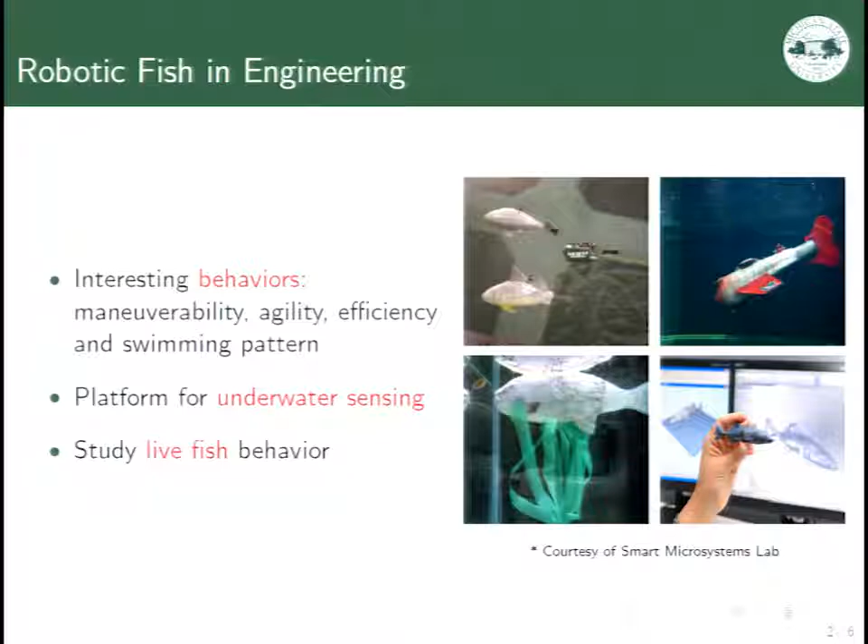And also in our lab, one of our main goals is to create a platform for underwater sensing for environmental purposes and also to interact with live fish to study live fish behavior, which is good for biological reasons. So in this work, I focus on robotic fish that is actuated by pectoral fins. There are a lot of studies in the literature dealing with rigid pectoral fins and flexible pectoral fins.

But the drawback to all of those which are connected to the body through rigid connection is that they may need different actuation speed for power and recovery stroke, and then they have only 1 degree of freedom. So if you want to add another degree of freedom, you have to add another actuator, which would increase the robotic fish size. So we came up with a novel design for a flexible passive joint, which overcomes all the drawbacks that I mentioned before.

The joint is designed in SolidWorks and is 3D printed as one integrated piece. And the stopper there is actually what is enabling the robotic fish to have an asymmetric power and recovery stroke speed.

So we also modeled the robotic fish utilizing such a joint. The hydrodynamic forces on the pectoral fin were calculated based on blade element theory. The actual passive joint is modeled as a pair of torsion spring and damper. And by having all the forces and moments on the robotic fish center of mass, we are able to fully calculate the robotic fish behavior.

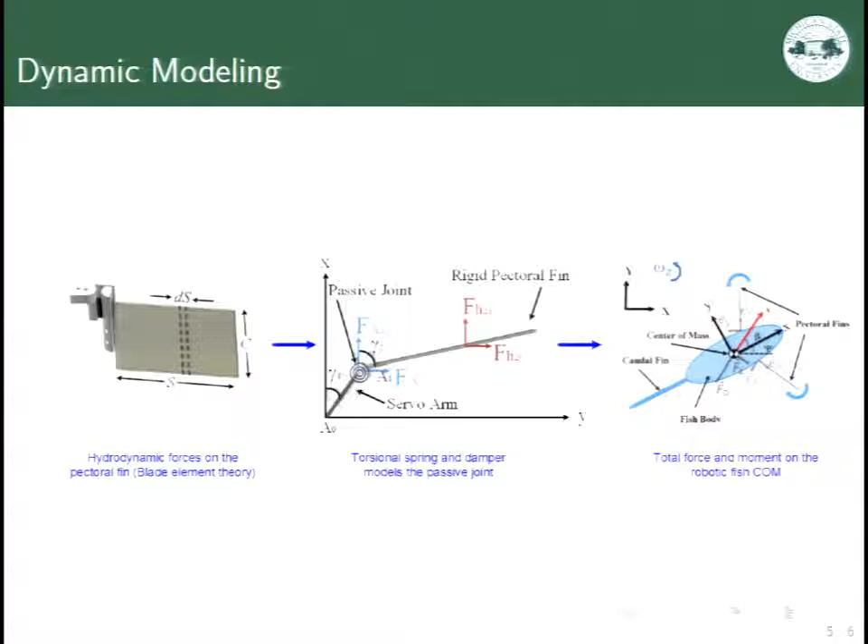So we put the robotic fish under a lot of experiments to evaluate our dynamic model, such as forward velocity, turning radius, and period. And also we focus on the flexible passive joint dimension and stiffness in order to optimize our design for the passive joint. Finally, we compared the performance of the robotic fish here with the traditional rigid connection versus our proposed flexible connection, and you can see that the robotic fish on the farther left is performing better. So I would like to discuss more during the interactive sessions.

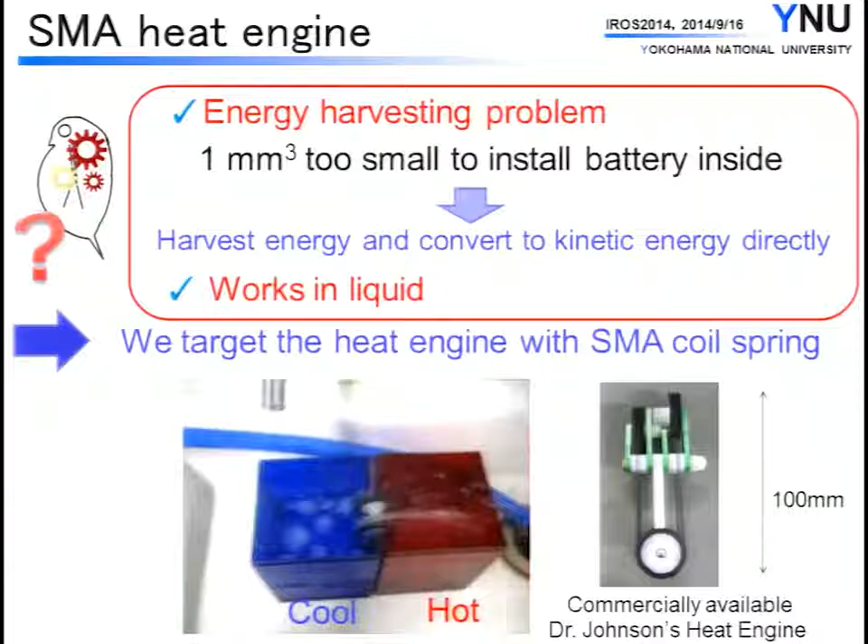So in this paper, we target the heat engine with a shape memory alloy coil spring. As you can see here, the heat engine rotates strongly if given a temperature difference between hot and cool water. Unfortunately, there is no literature about how to analyze this kind of heat engine.

So at the very beginning of this research, in this paper, we propose a dynamical model and show the basic procedure of analysis from first principles. And we finally get the optimal formulation that gives maximum power and torque. Let's discuss more about the perspectives of this heat engine at the interactive session.

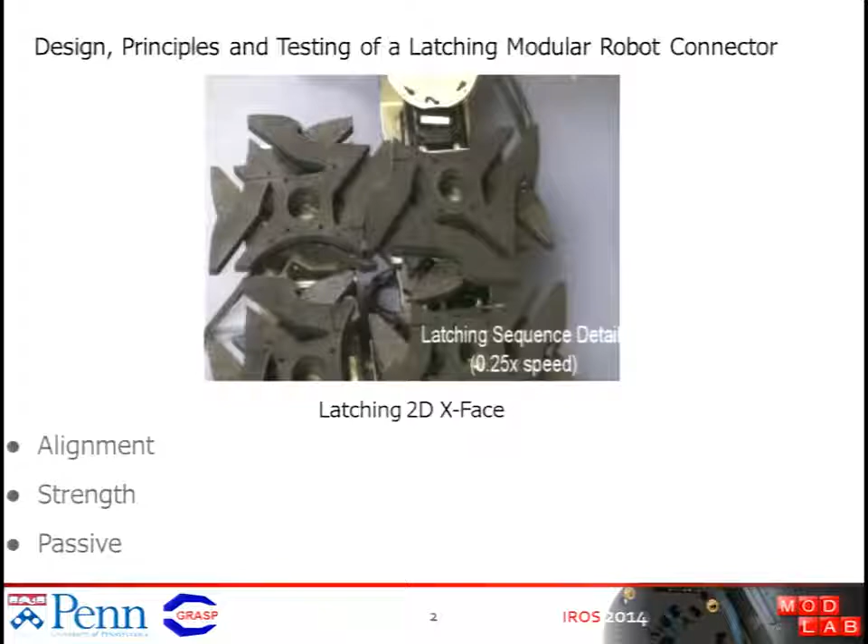So if we look at why we're doing this a little closer, in particular, we want high alignment because in many modular robot systems, we're connecting and disconnecting frequently, and it may be at the end of a long chain in a chain-type modular robot, for example. In a chain-type modular robot, the errors accumulate according to second order based on the number of modules. So this can build up rather quickly, and having a good way to correct the error without adding design complexity is very nice.

So in order to understand the properties of the connector that I'm presenting, we've developed a new metric for these connectors called the bonding ratio, which is simply the ratio between the force required to disconnect and the force required to connect. This is important for our robots because we want to know how many modules it can actually support along the connector, as well as compare that to the characteristic force that the modules are able to exert.

And then we've tested this in a tensile testing machine over several sets of design parameters and shown the strength and the bonding ratio for each.

We've also demonstrated several scenarios, including progressive latching, showing that you can do it in a zipper fashion at the end of a long chain, and a control sequence to ensure a good latching fit.

So you'll see in this video, this is a 12-module chain that successfully latches using the connector. And you can see it goes past the nominal latching point a little bit and then relaxes, and that's just to ensure a good fit.

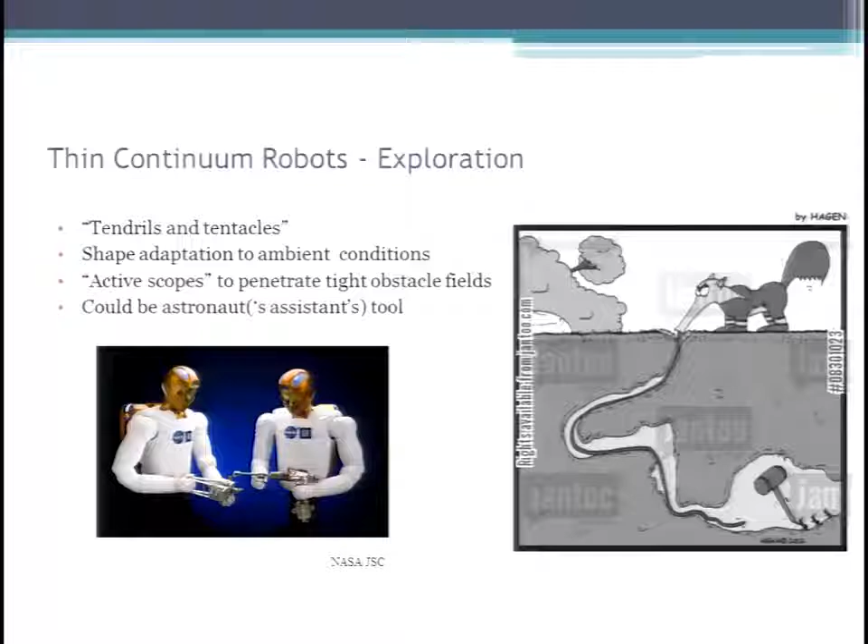The motivation for such robots can be said to be the endoscopes used in minimally invasive surgery, or in nature like the anteater's tongue and tendril used by climbing plants.

Their flexible and shape-adapting structures were emulated for the first time by NASA in its tendril, especially focusing on the unique sizing constraints. However, detailed study of tendril at Clemson suggested that structural improvements were essential in order to have a practical or application-oriented control.

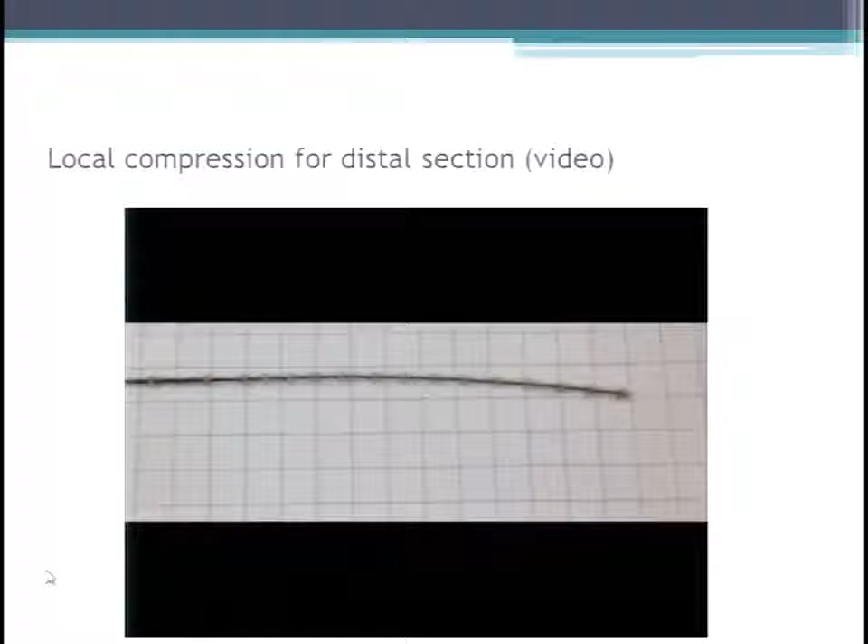Hence, a detailed comparative study of the current state of the art was conducted. This study suggested that a superior design was possible by incorporating features of a concentric tube robot in a tendon-based design. This would help to provide local compression as seen in this video, along with multi-section bending, which is seen in continuum robots.

Now, since this was intended for space applications, the actuation unit needed to be as compact as possible. Hence, springs were utilized in the design so that linear actuators, which is normally a bulky system, won't be needed. A simple motor encoder system, which was controlled by an Arduino, formed this compact actuation package.

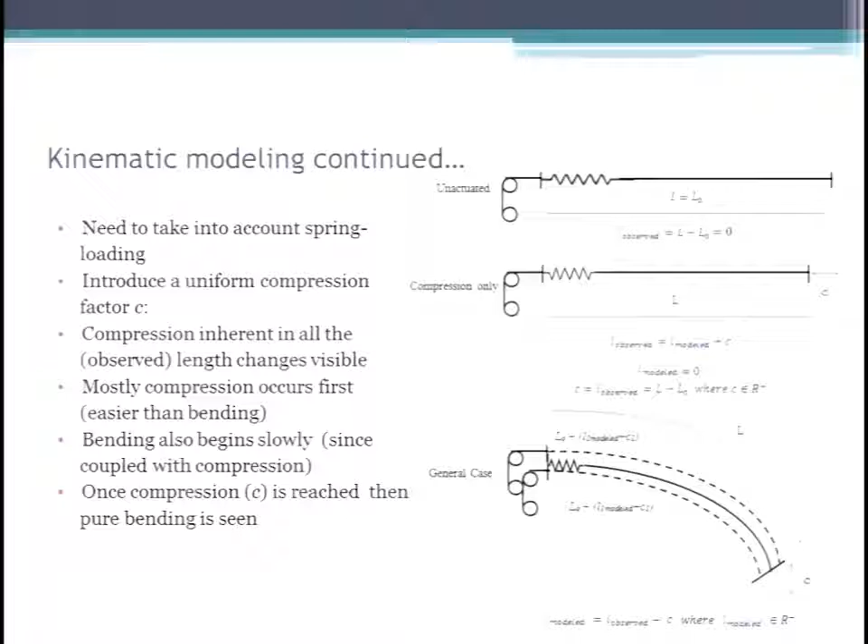The kinematic modeling needed to incorporate the spring loading, and hence a compression factor was introduced in the established kinematics. In particular, in order to achieve the different configurations or shapes of the robot, it was essential to map the measurable quantities with the different shapes of the robot. For this purpose, experiments were performed with the cable robot hardware, and data was collected from the sensors and the robot shape.

Linear regression was used, and it was found to be effective, and the results agreed well. Thus, in conclusion, the cable robot hardware is the first prototype of a long and thin continuum robot with a compact actuation unit and its forward kinematic analysis.

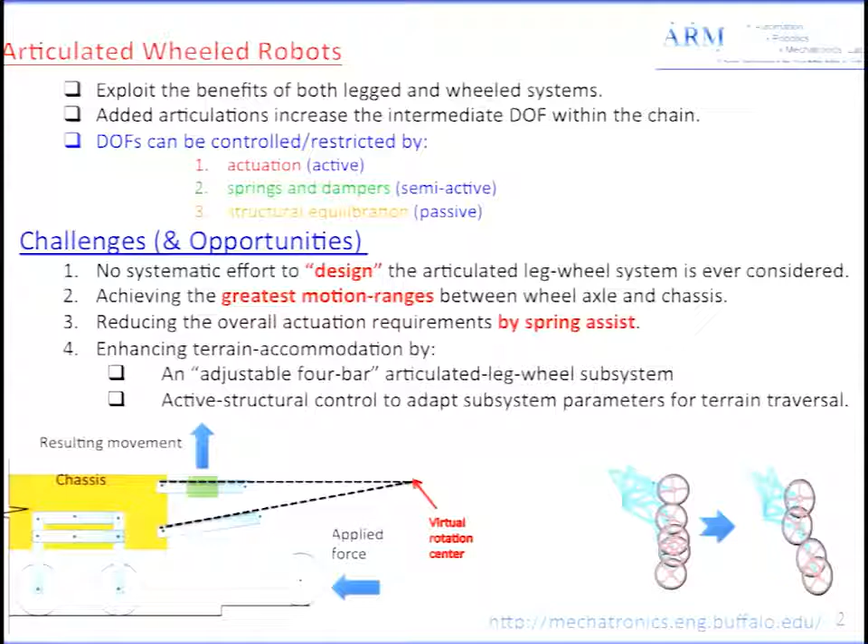And we are looking for the greatest motion ranges between the wheel axle and the chassis, and we are going to reduce the overall actuation requirements by a spring assist. And for enhancing the terrain accommodation, we propose the adjustable four-bar articulated leg wheel subsystem and active structural control to adapt subsystem parameters for terrain traversal.

Here we can see a four-bar mechanism that we use in our modified design. The first design was based on the four-bar mechanism, and this one is a modified design. We can see that the modified design is better suited to absorbing disturbances from the obstacle by moving up and away from the obstacles.

Now let's focus on the adjustable four-bar mechanism. The design process starts with position and velocity analysis, then moves to kinematic synthesis, where we determine the length of the individual links that make up the mechanism to perform a desired motion generation. Next, in the kinetostatic synthesis, we guide the attached wheel through several positions while supporting a set of specified external loads.

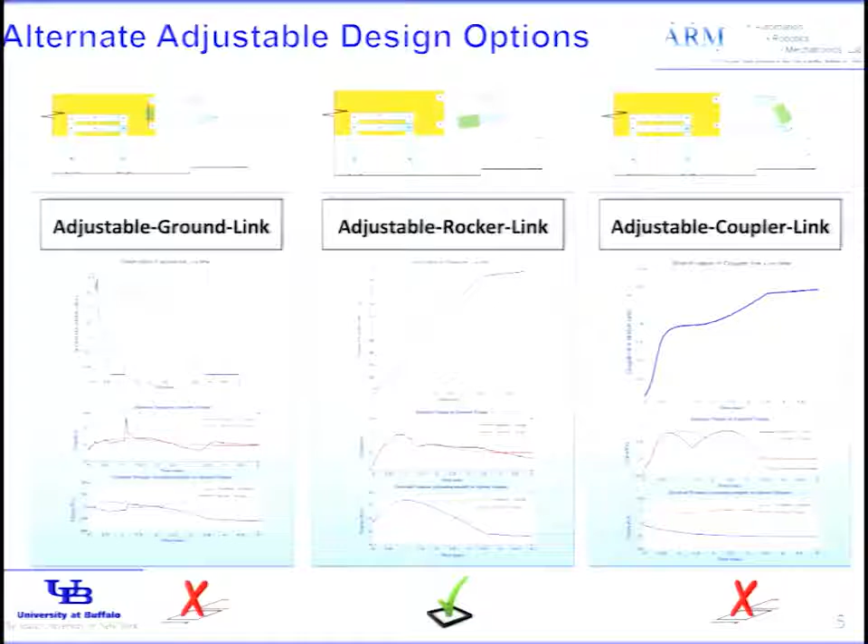Good afternoon. My name is Carlos Viegas, and I am a PhD student from the University of Coimbra. Today I'm going to present a single degree of freedom arm for transition of climbing robots between perpendicular planes. Climbing robots are very useful tools for inspection of human-made structures.

However, they face some challenges because these structures are mostly three-dimensional, so they include obstacles such as ridges, flanges, gaps, bends, and branches. The climbing robot must be able to overcome such obstacles. Our goal was to develop a transition mechanism which would be compact and lightweight and would enable the robot to overcome these obstacles.

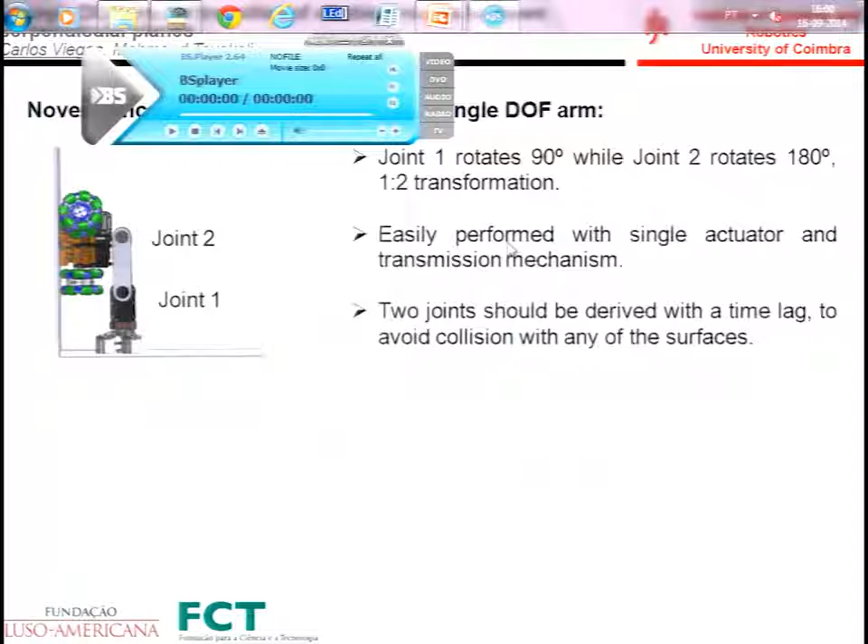Our concept was to use a system with two joints that would rotate simultaneously, as you can see in the video here. One joint would rotate 90 degrees, while the second joint would rotate a full 180 degrees. This could be easily performed with a single actuator and a transmission mechanism. However, these two joints should be driven with a time lag in order to avoid collision with any of the surfaces.

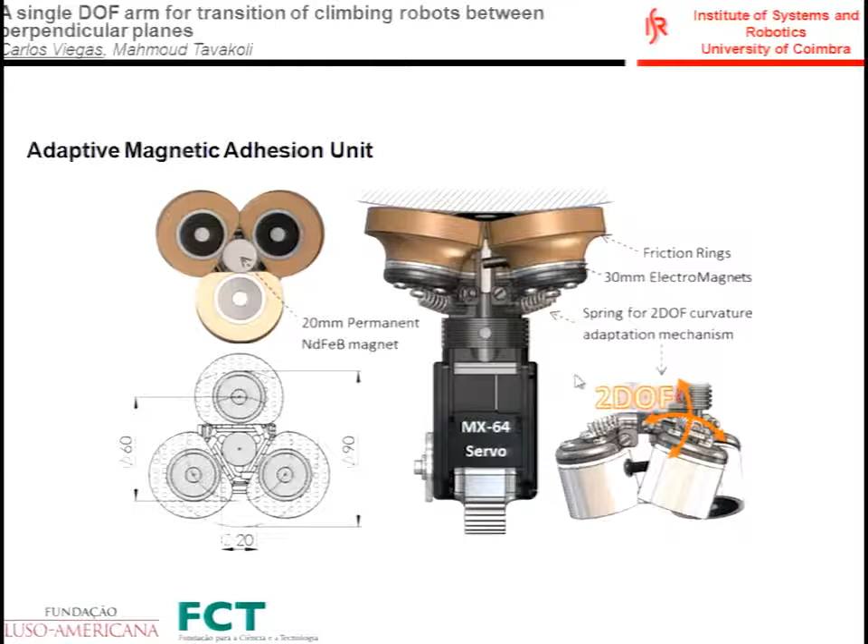This is a detail of the mechanism we developed; I will explain further the details in the interactive session. This is the magnetic adhesion unit that we developed. It is capable of adapting to both flat and curved surfaces, and it uses magnets to connect to the surface. Now I'm going to show you a video of the mechanism in action.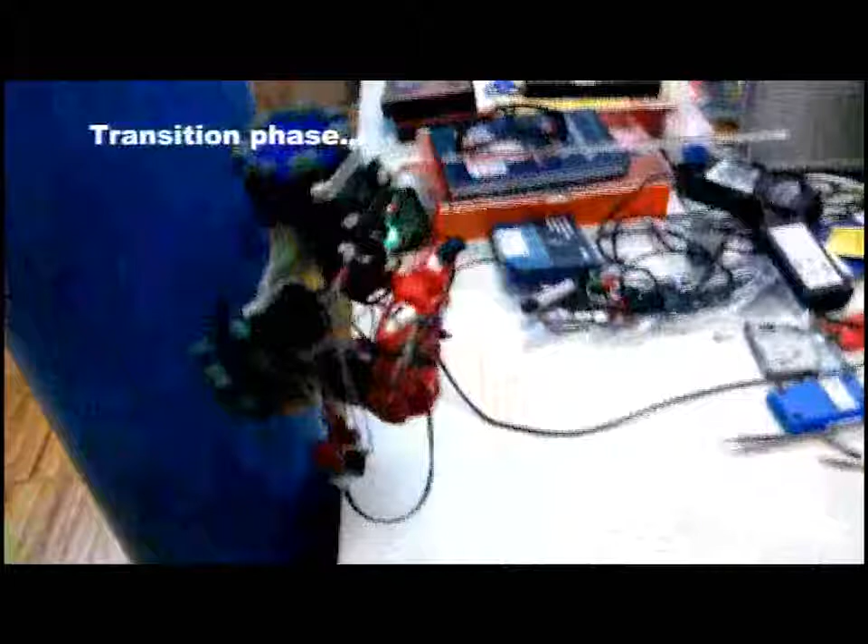Hi, my name is Woo-Seom Lee from KIST. Today I'm going to speak about the safe joint mechanism for manipulators.

The reason why we need a safety mechanism is simple. First, we want to guarantee safety when we use robots in public areas. Secondly, we hope to make robots make soft contact with us for safe interaction. Then the question is how to achieve our target.

In our research, as for the mechanism, we made a flexible mechanism and a release mechanism. The sensing function of the external torque was developed by measuring deflection of the flexible parts. So we can make soft contact, and the impact force is reduced by using this flexible mechanism and external force sensing. Then the excess contact force could be cut off by the release mechanism.

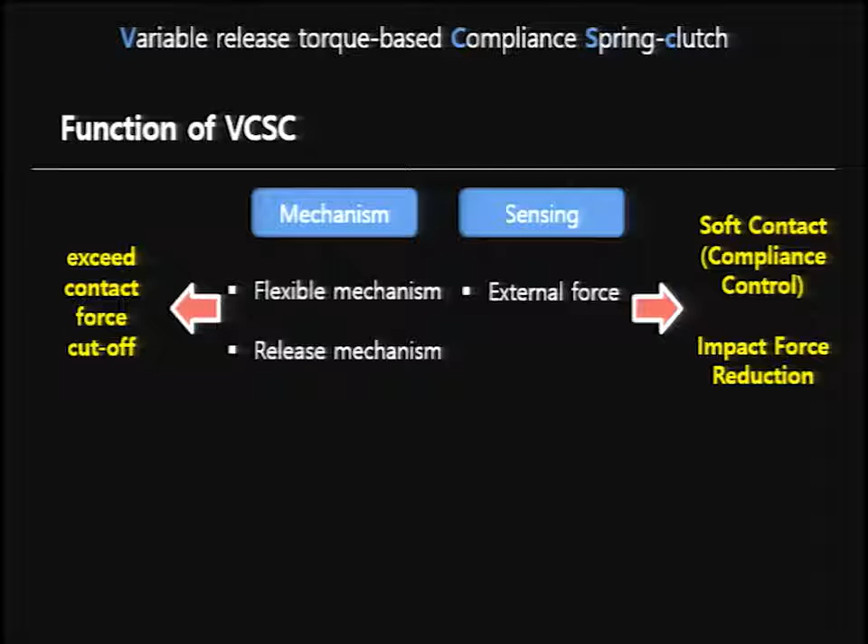From this basic idea, we made the safe joint mechanism, and its name is VCSC. The flexible mechanism and the release mechanism are composed of a ball and cam plate, and we use a cheap and simple distance sensor for external force sensing.

We have one more plate, and this plate is in contact with the other side of the spring. So if we rotate this plate, the pre-compressed length of the spring is adjusted, and then the property of the flexible section and the release torque are changed.

In our idea, the motion of this compensation cam plate is mechanically synchronized with the joint motion of the manipulator. By using this function, we can eliminate the effect of the changing gravity force when the position of the joint link is changed.

So the delta value of input torque to generate the release motion is maintained as a constant value. The motion VCSC is like this video.

This shows the flexible motion, and if we apply torque over the release limit value, the release motion occurs, as in this video. When the angle of the base is changed, the pre-compressed length of the spring is changed, as in this video. Thank you for listening, and we will have a detailed discussion during the interactive section.

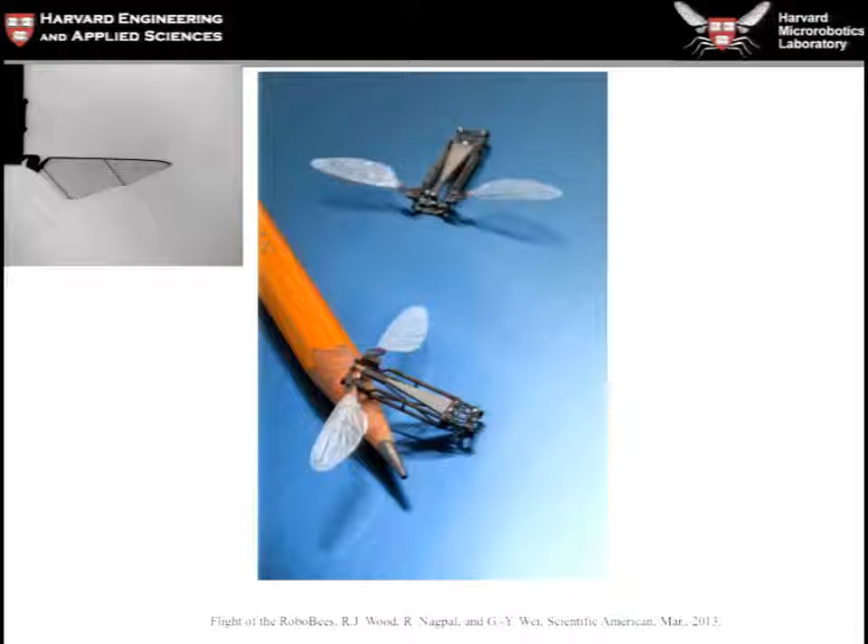The RoboBee's wings are attached to a body frame and piezoelectric actuator via microscale polyimide flexure hinges. These hinges are cycled at 100 to 120 hertz and are given deflections of maximally 45 degrees, making them relatively large deformation hinges.

However, one of the main limits on the RoboBee's flight was the shortened lifespan of these hinges. Although the polyimide they're made of has been shown to last on the order of 10 to the 7th cycles under similar loads, our hinges would fail after about 70,000 cycles, or about 10 minutes of flight.

We suspected the reason for this was the asymmetrical loading on the hinge due to the wing flapping motion, which resulted in a much higher stress on the hinge.

While many models for flexure hinges exist, they are highly application specific and are designed for injection molded hinges, which made them unusable for our application.

Our solution was to use an approximation of the stress on a hinge assuming purely axial loading, in other words, ignoring the swiveling motion on the wing.

The model had three main variables: hinge length, thickness, and angle of curvature. But since thickness and angle of curvature are limited by the RoboBee's flight mechanics, our study focused on the relationship between length and lifespan.

Finite element analysis of the hinge modeling was validated using our previous model, which matched almost exactly with the FEA computations for the stress on a hinge with purely axial loading.

When including off-axis effects, the FEA computation showed stress was greatly magnified, explaining why our hinges had been failing so quickly. A preliminary investigation showed great improvement in hinge lifespan when lengthening a hinge.

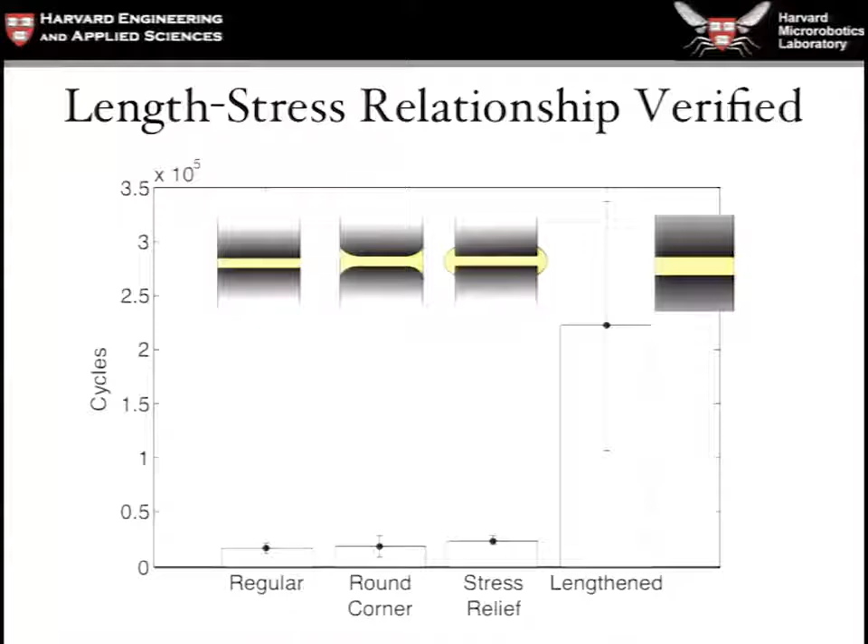These results were verified in a more comprehensive study of many hinges with differing lengths, demonstrating a very strong correlation between increasing length and increasing lifespan.

Hi, my name is Aaron Dollar. I'm presenting work done with my student, Joseph Belter, at Yale University. The concept is fairly simple.

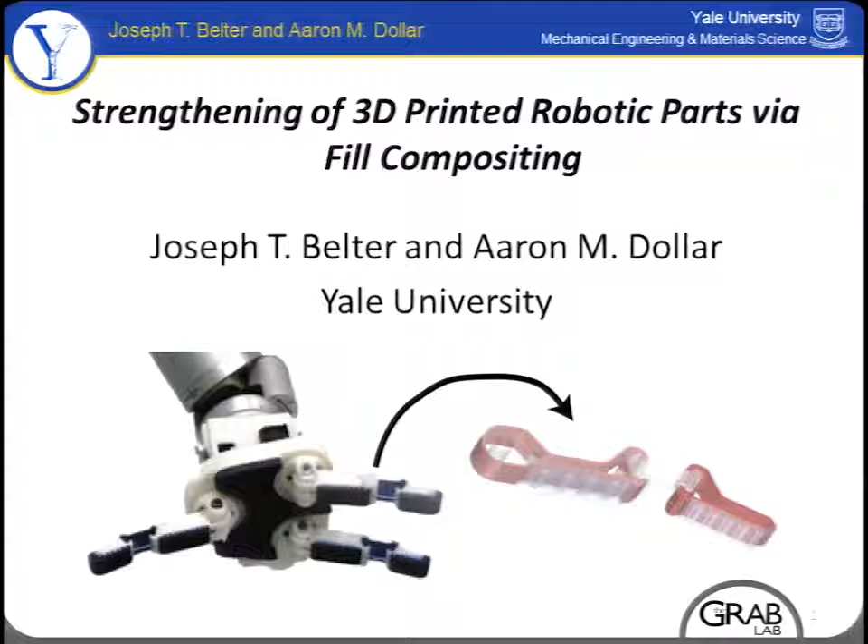We all know that 3D printed parts are everywhere and becoming more and more ubiquitous, but there are still a lot of limitations to what you can utilize these parts for, in large part because of the limited strength available in the materials for the more common 3D printed processes.

So we wanted to see what we could do to improve the strength of 3D printed components without really changing the process all that much, while retaining a lot of the benefits that 3D printing provides.

The idea is fairly simple. We look to stronger resins and try to make composite parts essentially by filling voids in the components with these stronger resins.

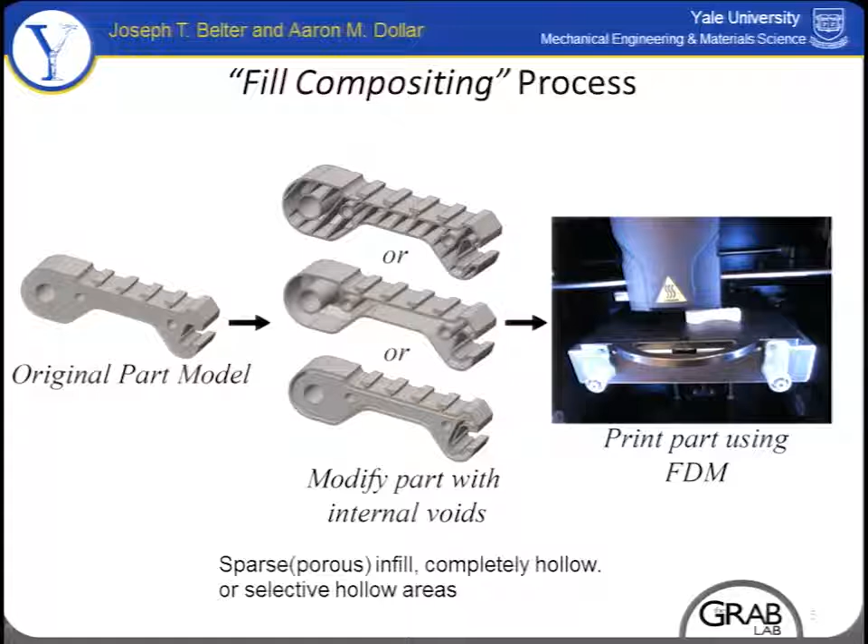The essential process here is that you take the original part model that you might have printed solid, in ABS - we're looking mostly at FDM printers - and you design in some voids, either channels or meshes, into the part. After printing, you go in and fill it with higher strength resins in order to get a composite material. We call this fill compositing.

We tested pretty systematically a fairly large number of different options against the baseline FDM parts and the solid, a couple of different epoxies, as well as some different fill options, and I can tell you about the details of these. We tested them all in a standard ASTM 3-point bending test on an Instron.

We also tested them, besides just these standard bar components, in some more robotic application components. And basically, the result was a substantial increase, depending on the specific application, in strength and stiffness for these components. It's a fairly straightforward process to implement.

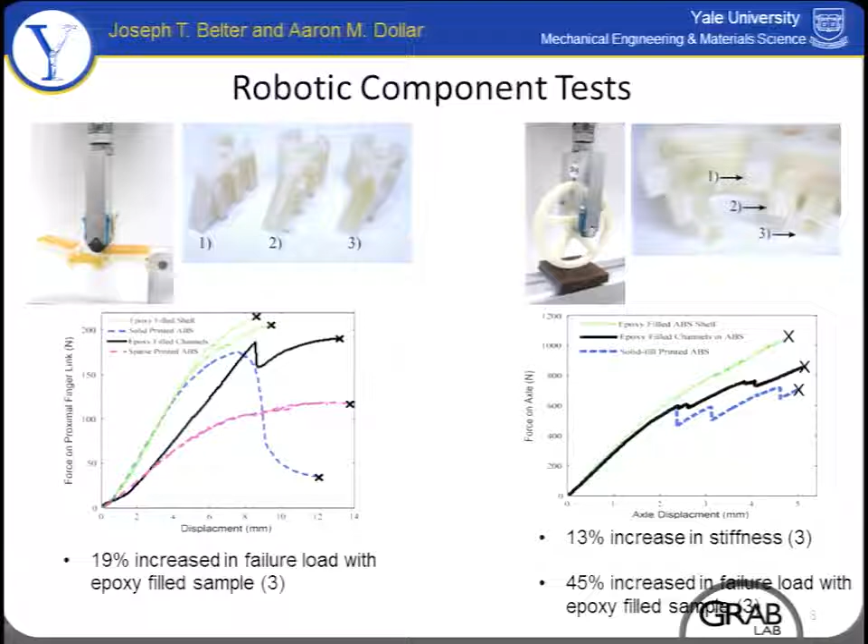So the results were fairly good. We can tell you more about the specific details and the specific results at our poster D118. Thank you.

Good afternoon folks, my name is Ankur Mehta, and today I'll be presenting our steps towards a compiler that can automatically design robots based on a high-level functional specification. I'll describe our system that allows a user to quickly and intuitively co-generate mechanical, electrical, and software designs to create user-programmable robots on demand.

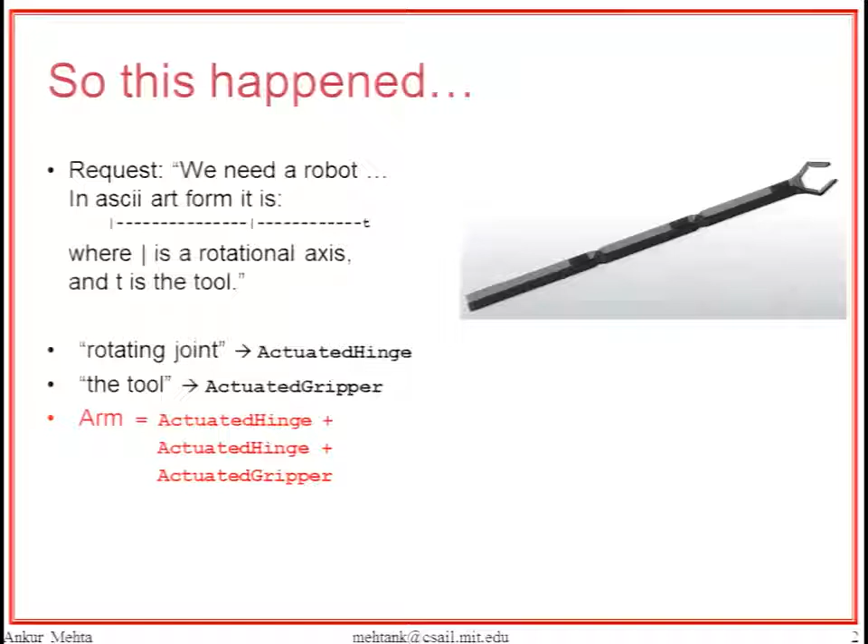Instead, we can identify the structural specifications with hierarchically composed library elements from our system, which can then simply be connected to form the final robot design. Though this image only displays the mechanical structure, the system also defines electrical components and wiring, microcontroller code for firmware drivers, and a high-level user interface, generating fully integrated, directly fabricable designs for an immediately functional robot.

More generally, a user starts with an idea for a desired electromechanical device and breaks it apart into functional elements. If these elements do not yet exist in our design library, the process can recurse on the simpler functional elements, hierarchically building up ever more complex assemblies from basic building blocks and previously generated designs. Once a satisfactory decomposition is found, the user assembles these components using an intuitive design script, which is then compiled to co-generate the integrated, fabricable designs.

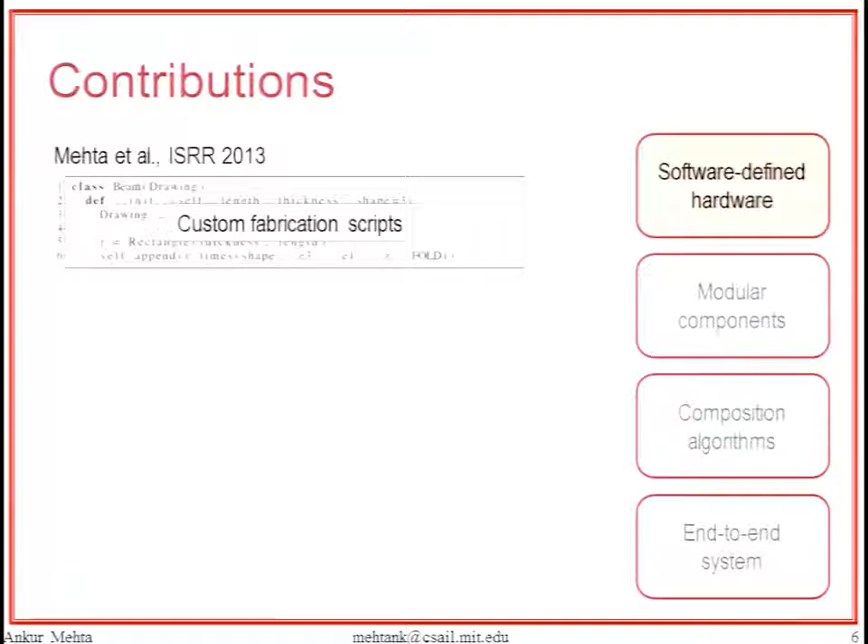This robot compiler is built upon a number of algorithmic and computational developments. A scripting language defining mechanical fabrication was extended to include definitions of electrical and software elements in a unified, functionally defined abstraction. This encapsulates the computation required to generate the fabricable designs from each parameterized module. These modules extend the design library of mechanical building blocks to also include discrete electric and electromechanical devices, along with firmware drivers, software blocks, and user interface elements.

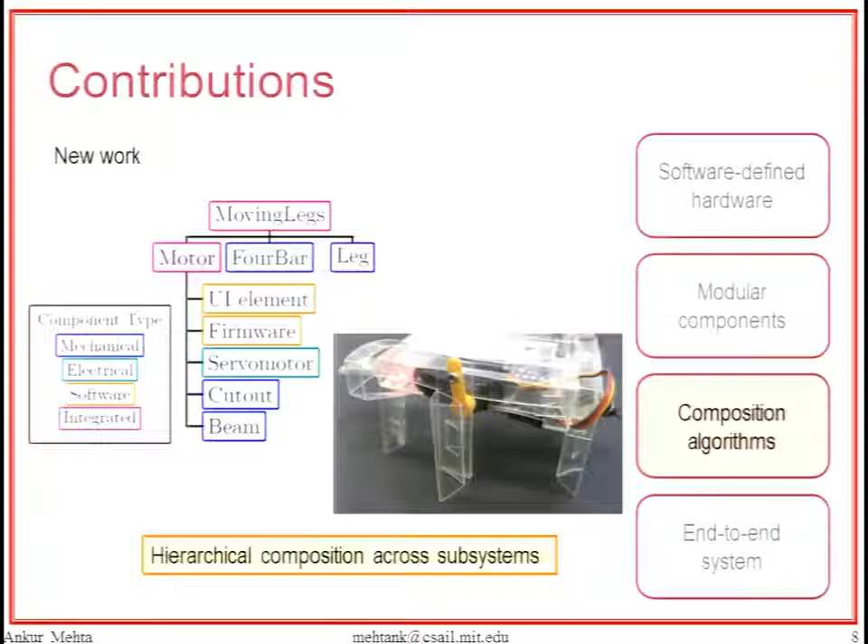A collection of algorithms hierarchically combine these modules across subsystems to generate integrated, programmed electromechanical mechanism designs from their constituent building blocks. Finally, all the above are wrapped into an end-to-end system that allows a user to compile an assembly of mechanisms into a collection of directly fabricable mechanical, electrical, and software designs, yielding fully functional robots.

This compiler was used to assemble our library elements into several different robotic designs, and I invite you to come play with our auto-generated robots as you learn more about this design system through our interactive session. Thank you.

Hello everyone, I'm Ryuta from Ritsumeikan University in Japan. This work was done by my student Yuuki Mishima. Now he is working at the Kubota Corporation.

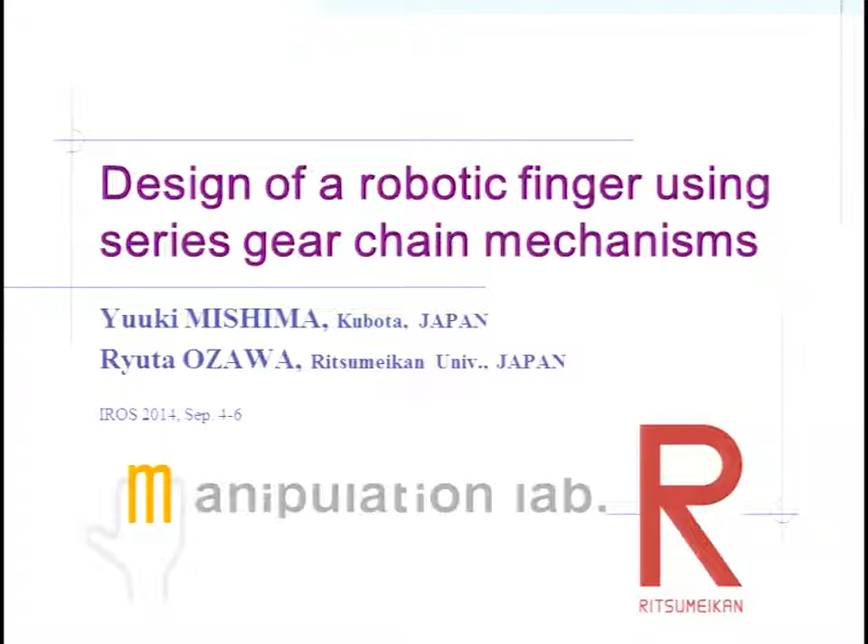In this research, we treat a design issue of an actuated robotic finger with a special transmission. The design of an actuated robotic hand is a very hot topic for the application of adaptive grippers and prosthetic hands. Adaptive grippers are usually required to simplify the control method, and when designing a prosthetic hand, we need to consider a trade-off between decreasing the weight and size and increasing the grasping functions. So the conventional solution to design this robotic hand is to combine several underactuated fingers, each of which is driven by at most one actuator.

The requirements of these robotic fingers are to realize a connected motion in free space like this, and to realize adaptive motion when the finger contacts with the environment or an object like this. The typical solution for this underactuated design is to use a parallel link mechanism like this, and a tendon-driven mechanism like this. In this case, we use the static equilibrium of springs to determine that configuration.

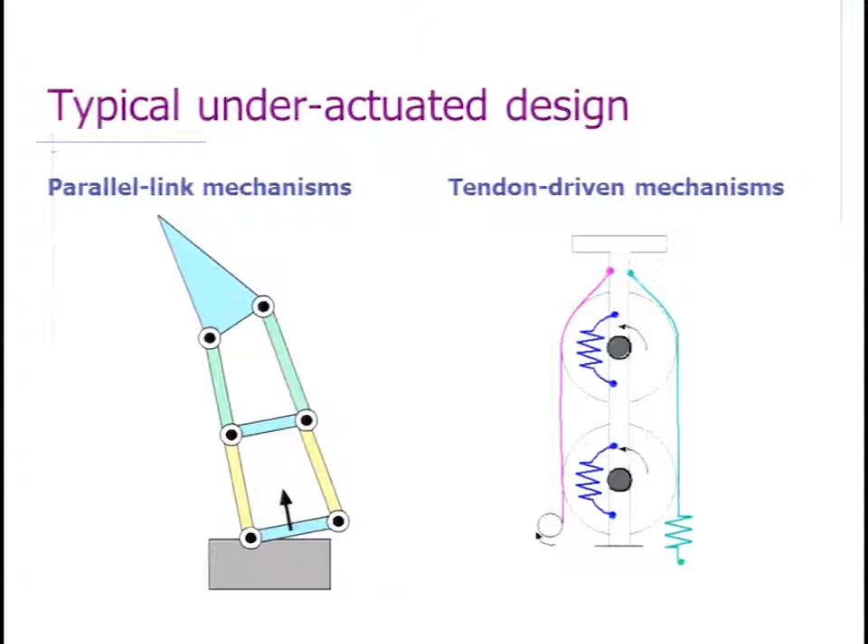However, we use a different approach. The basic idea is to use special gear chains like this, consisting of a constant gear chain here and a drive gear chain like this. As a result, we can realize connecting motion like this in free space without using large actuation power, and we can also realize adaptive motion like this when the finger contacts with the object. This design also simplifies the assembly.

We also brought some small mock-ups. I hope to see you in the upcoming interactive sessions. Thank you very much.